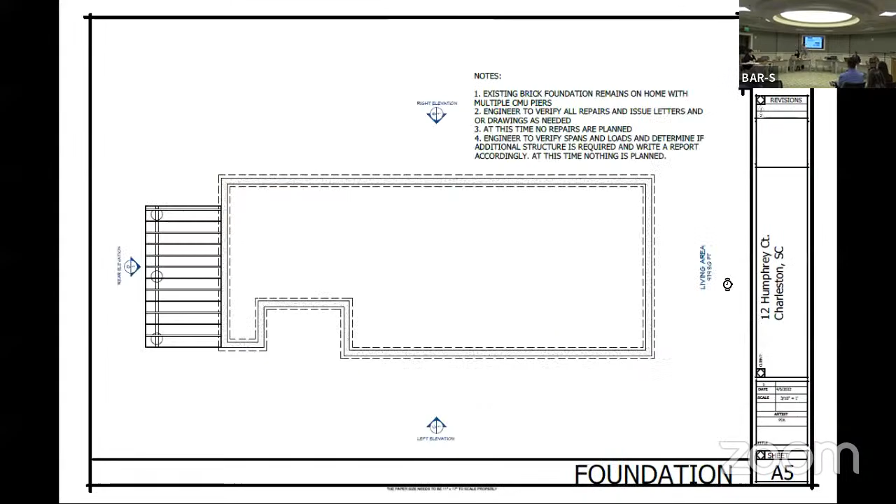I will apologize to our audience. We have an issue of reaching a quorum on this item, as one of our board members will have to leave after this first item, and I need him to participate in this particular review. So after this, we will jump back to our first agenda item.

37 New Street is requesting after-the-fact approval for removal of historic fabric from the front facade and reconstruction with CMU. A sample panel was reviewed on site this morning. It is a category 2 structure in Charleston, circa 1865, in the old and historic districts.

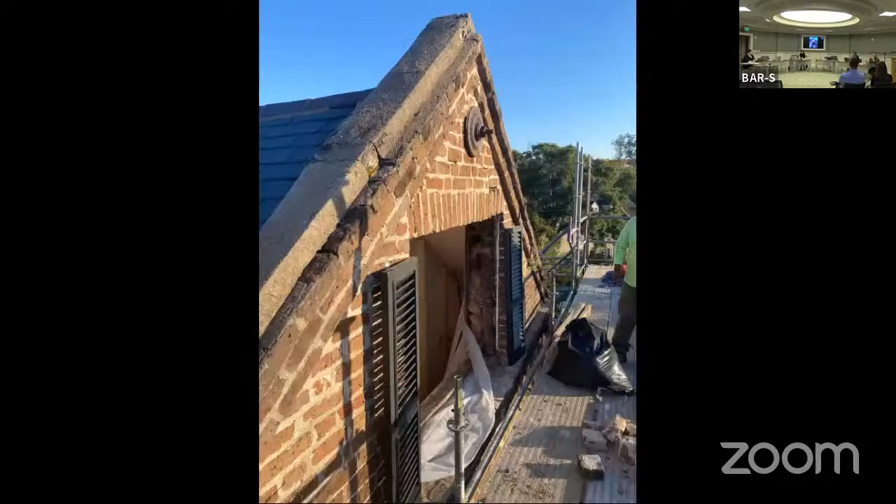I believe this is the beginning of what you guys provided for this week. I'm Julie O'Connor, and I'm here with Buzz Morris, the contractor on the project, Mrs. Ann Thomas, the owner of the property, her daughter Lisa, and Russell Rosen, the engineer on the project.

I'm just going to do a little introduction and then turn it over to them for the other details. For those board members who weren't here last time, Mr. Morris was hired to repoint and repair the front facade of the house. When he began, he realized there was a dangerous bow on the front, and he consulted with Mr...

Rosen was also very concerned that the brick was going to start falling off of the house, so they took the brick wall down. They saved about 95% of the bricks, and they are on site. Then they began the process of rebuilding the wall with CMU per Mr. Rosen's structural detail.

And then reinstalling the brick. The brick was installed fine, but the mortar was pretty sloppy and messy, as was noted in the last meeting. While we were on site last time, April Wood from Charleston Foundation recommended reaching out to Mr. Morris. He contacted them immediately, and they are the ones who have done this new sample.

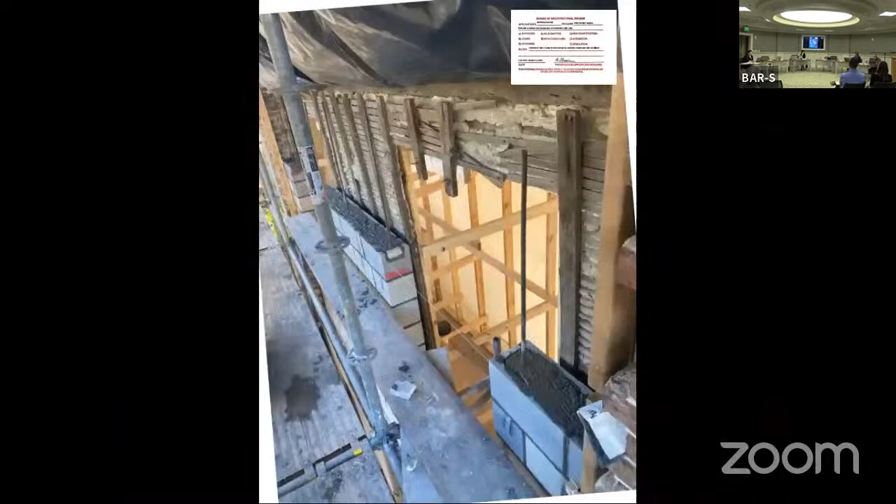Frankie, could you put up that picture from today? We were asked to supply a mortar sample to staff for them to approve, which we did, and brought the mortar sample just for the board members.

We were asked to submit a structural report, which Mr. Rosen did, and he is also here to talk and answer any questions. We were asked to do the mortar sample, which we did, and a mortar analysis, which Metters performed, and that's in your information. And then also the new test panel, which is a huge improvement.

I have a question I wanted to ask during the presentation, but that's out of order. I'll wait till you're done. It's okay, you can ask. Well, I'm sorry, I didn't know about the meeting this morning.

Can you just point out which is the latest sample? I'm a little confused about what is the latest sample. The latest sample is here at the top. And it's going into the old right here. This is the good one, the one we do want, not the one we took down.

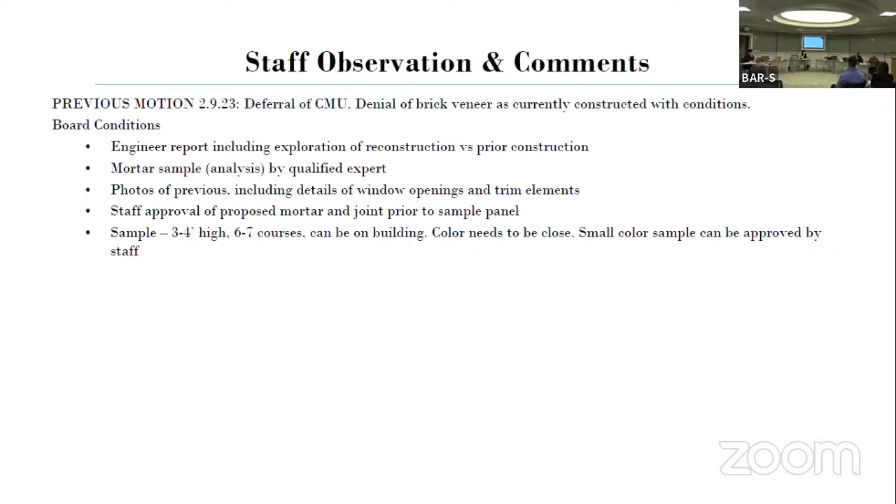So, want to let the board know that we have received the mortar sample of the joint, which we've now provided to you guys. As for comments, the engineer report does not include exploration of reconstruction versus prior construction, or detail how the new CMU wall ties into the historic brick wall. I believe those were both things that were included in the previous motion. Staff has concerns about how the brick veneer is tied into the CMU wall and the sustainability of those ties. The existing brick veneer should be removed and redone with clean mortar joints. Old mortar should be cleaned off bricks before use in the new veneer. So staff recommendation is approval of the sample and denial of the current installation, for it to be redone correctly.

Thank you. Does the applicant have a response to any of that? Morris Construction. I feel like you're talking about the report that Russell created for us to explore rebuilding it like it was originally built, and that kind of thing doesn't get thought about with modern construction. It's just not useful.

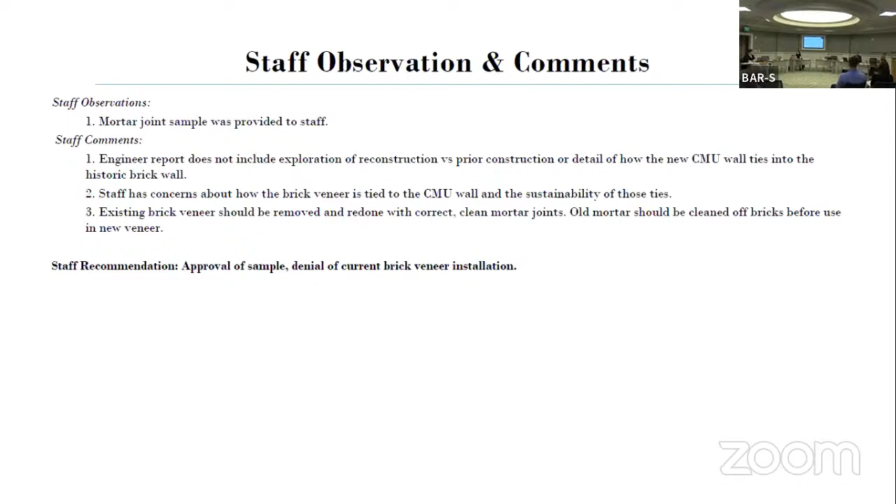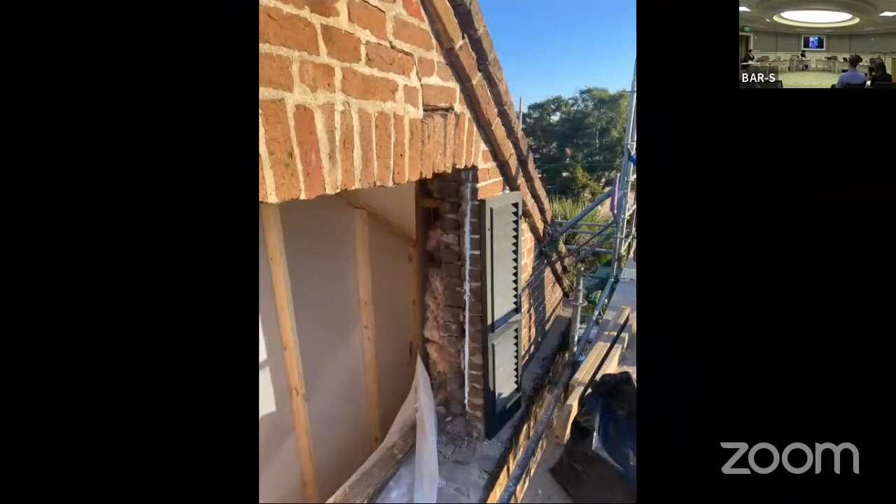I have one more comment, because I respectfully take issue with what Preservation Society said, because I think it's inaccurate. We are charged as professionals with making the building safe and stand up. You can't always build something the way it was built, as Russell just said, because if you did, it'd fall right down again—not only literally, but physically with the codes we have to meet. So I do think that's inaccurate. And that's not to say that what happened here was wrong.

It was approved for just repointing, should have been repointed. The error is that this whole thing came down, and granted, if it was a safety issue, that's fair and I acknowledge it. But there should have been a call to staff—wait a minute, we've got an issue, could you come do it? You'd probably hear Mr. Rosen's explanation of all of this and say, okay, unfortunate, but let's do it. And that's what we have to do.

So I think it was incorrectly stated prior with the comment on the Preservation Society. The error is in fact with the process and how this was handled for getting it here, but it's where we are. So it feels like it's more addressing the physical appearance of it presently.

Do we have a motion to consider?

And that's after you suggesting that the brick veneer gets removed—yes, what they had installed before. That was the previous board motion, denial of the brick veneer as currently constructed, and then there were conditions that more information was to be provided. So we were just reiterating that previous motion, that we were recommending approval of the sample, but that the current installation be denied and the brick itself be redone, per the previous motion.

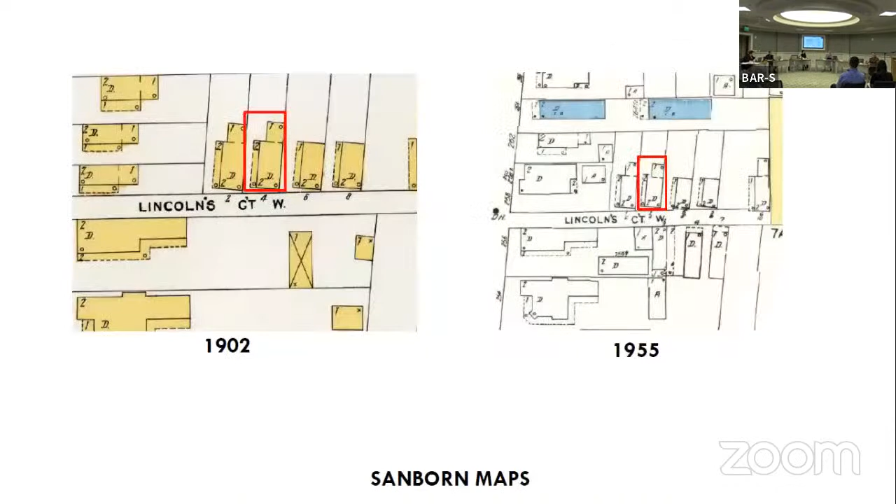So my name is Jason Myers. I'm with MFI Properties. We own 12 Humphrey Court.

We got a little bit in front of ourselves. You go back to what it looked like.

So this is what it looked like when we purchased it. And this was all kind of aluminum siding. And when we got under this, the previous owners had already replaced the majority of this just with plywood. They had actually replaced this window, and these two windows look like they had been replaced, but they were maybe 40 or 50 years old. So this was all something that they did.

So when we got a hold of the property, we in turn got in there and started to investigate what we had to work with. Replaced most of the rotten wood, which was under the initial permit that we pulled. I came back and got a stop work order in summer, maybe August, that we'd gone a little bit in front of the permitted work. And then if you go to the white, okay, we had put up a Hardie plank and we had just enclosed that.

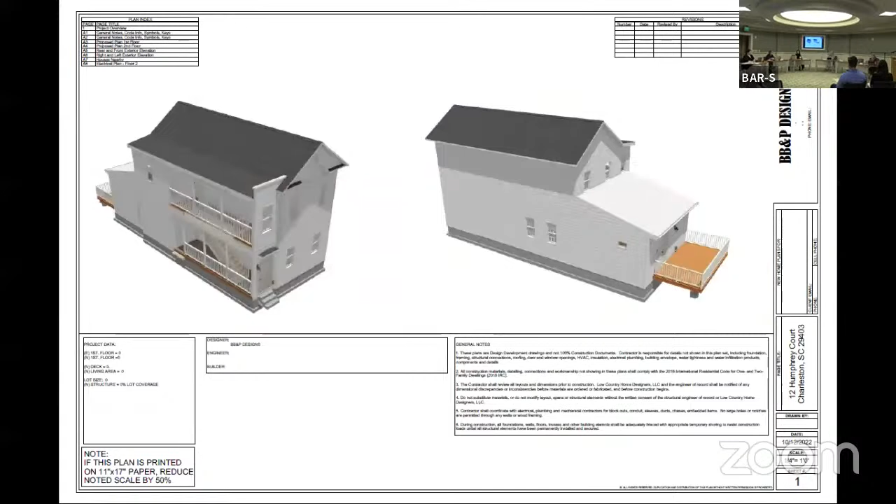So going back right here.

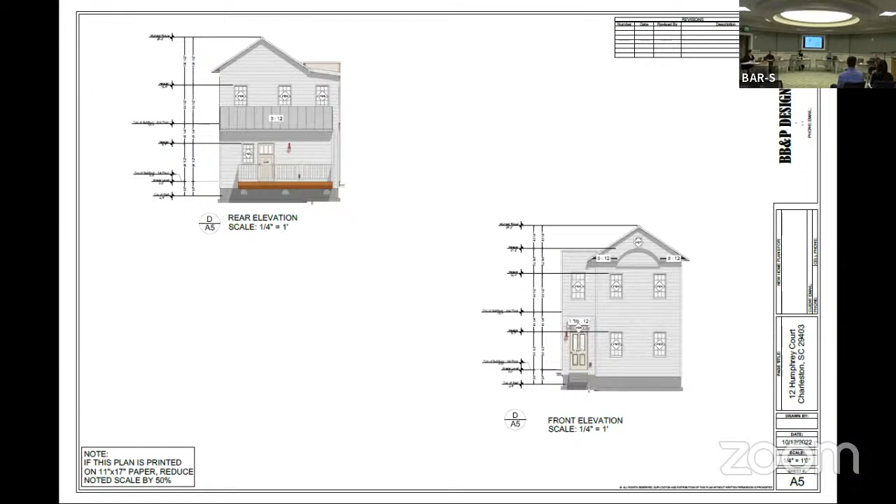I want to know the materials called out in the notes on the drawings, like the type of windows and the type of material you're talking about using. It was my understanding we need to go back with single pane windows that we could manufacture ourselves. Right, but what I'm asking is, if we're looking at a drawing, does it say that on the drawing, that's what you're doing? I'm not sure what all you guys have. I'd be surprised if it's not in there. I don't think there's four pages. Right, I'm just trying to see where that says that.

No reason to go. Yeah, that's something I know we have, so.

Other question? Public comment, or no public comment?

April Woods for Historic Charleston Foundation. HCF has reviewed the application for after-the-fact alterations to the piazza, siding and windows at 12 Humphrey Court. We're concerned about the extent of the removal of historic fabric and loss of historic character. If the applicant had worked more closely with the city in obtaining appropriate permits, this situation would not have occurred. We respectfully recommend denial of this application and recommend that the applicant work with city staff.

Preservation Society of Charleston. The Preservation Society is concerned with this after-the-fact request for what appear to be alterations to character-defining features. The submittal was difficult to understand as it did not provide information on the previously existing or current condition of the property. Clear information regarding what has already occurred without approval and what is now being proposed is needed before this application proceeds. However, based on our staff's observation, inappropriate unapproved changes appear to include completely enclosing the piazza, alterations to the piazza door and transom, as well as replacement of historic 6/6 windows, siding, trim, and other elements with modern materials. We ask this applicant to return with a complete submittal that clearly outlines the nature of this after-the-fact request, and in terms of new design, draws on neighborhood precedent to inform a sensitive proposal utilizing historically authentic materials. Thank you.

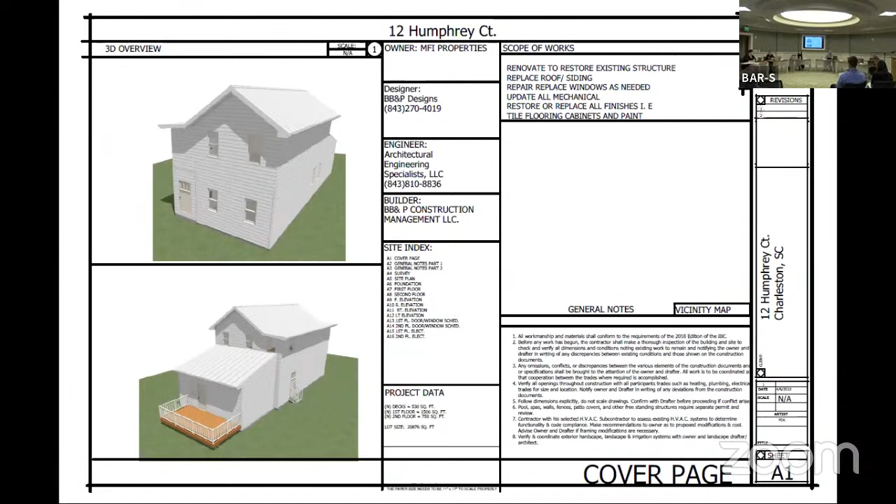I had a bit of a timeline which the applicant has already gone through, so I won't repeat that. We had a list of the work that had been done: removal and replacement of wood windows with vinyl windows, removal of wood siding which could be seen in some of the images under the aluminum siding, removal of the wooden front door, historic transom, the hood over the front door, and enclosure of the piazza. The applicant should submit revised elevations to match the previous structure, and floor plans to reflect the exterior of the previous structure. Windows should be replaced to match previous in size and materials, which would be wood windows, true divided light. Wood siding should be replaced to match in dimension and profile of the previous structure. The transom over the front door should be replaced to match, the front entry restored, and the piazza reopened to match previous, including the parapet and roof slope.

Our policy severely restricts enclosure of piazzas as they are character-defining features. So the staff recommendation is denial of the after-the-fact request, with reconstruction to match per staff comment. And typically when we go after the fact, there's a time limit on resubmitting to the board.

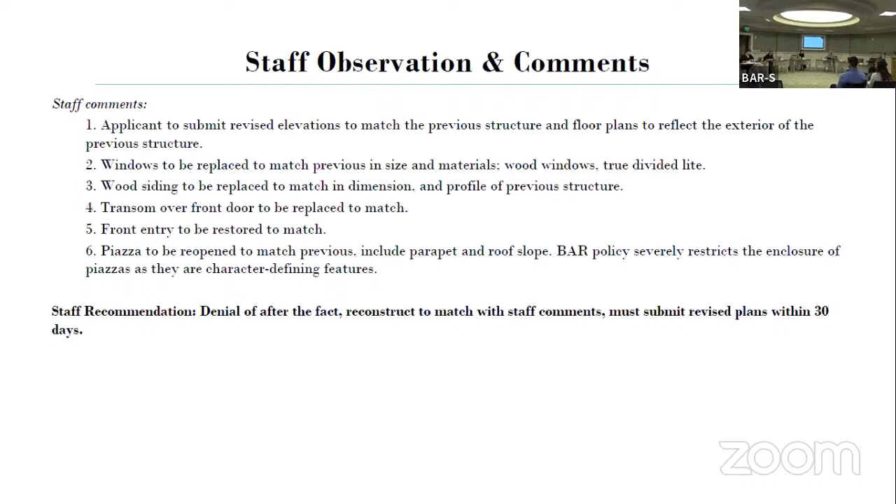Next item on the agenda is 167 Grove Street.

167 Grove Street is requesting a partial demolition of a historic structure, including the roof. It is category 4 in Wagener Terrace, with circa dates of 1935 and 1945, so I'll reference both. It is in the historic materials demolition purview. This property is located on Grove Street.

Existing site photos, some context of Grove, an architectural inventory photo from 2004, and a Sanborn map showing the history of the structure.

We'll turn it over to the applicants.

Members of the board, thank you. My name is Ben, and today I'm here with my wife Lauren. We've lived at 167 Grove Street for about 4 years, and previously in the Wagener Terrace neighborhood for more than 10 years. We love where we live and want to stay. We're recently married and looking forward to raising children in this unique and diverse neighborhood we've both called home for more than a decade.

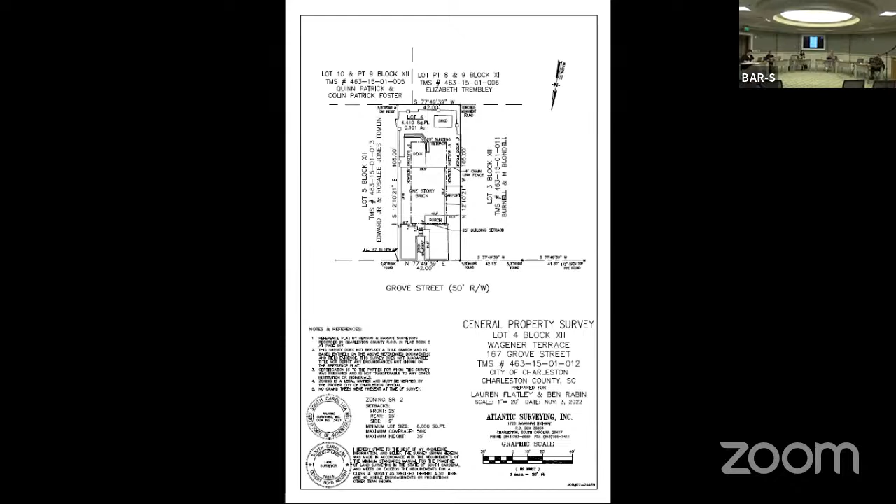The existing roof has an offset cross gable design, which makes it unreasonably difficult to utilize our attic space. We believe this roof does not carry historical significance or contribute considerably to the character of the home or streetscape in either its design or material construction.

Ultimately, we imagine a simpler roof form built from the existing bearing points, maintaining the eave profile with a moderately higher ridge, allowing for sensible use of the attic space as a livable half story. This change would be minimally visible from the public right-of-way.

The manner in which our home sits in relationship to the adjacent structures obstructs view of the roofline from street level. We explored layout options to add a staircase into the existing space, and the complex roof structure with its multiple valleys and supports doesn't allow for this design in a sensible manner.

At 167 Grove, we have a smaller lot size, and it makes more sense for us to build up rather than out the back. We understand that the board may recommend the addition of another structure with a zoning variance to the setbacks, but it is our desire to preserve our backyard space, which we greatly enjoy and consider an invaluable feature for our dog and our future family.

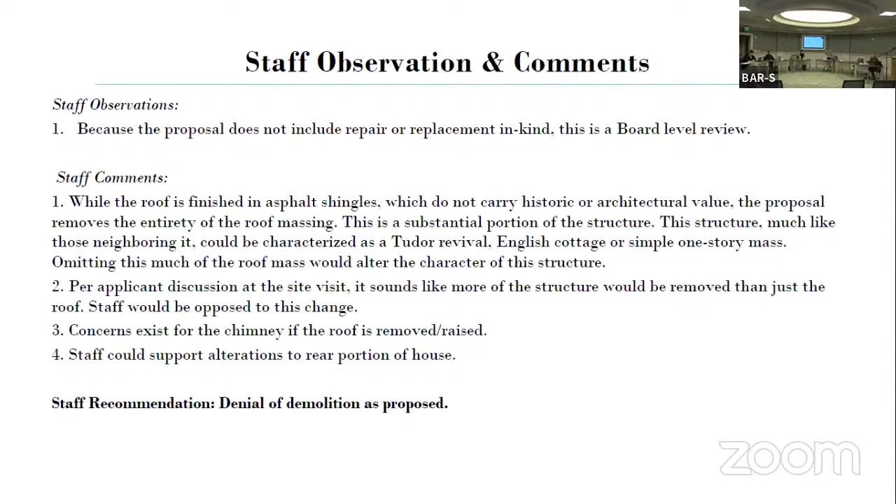Go to a couple of the photos. Sure.

I had one question about the one where you're in the attic - where is that at? Because it almost looks like there's a hip at the back side of the roof. I have my back to Grove Street in this photo, and where I'm standing, my head is probably at the main east-to-west ridge. I'm standing with my back to the street. Oh, I'm right up there.

Okay, so this is filled in from behind, inside of the attic. No, it's all open. Actually, I'm standing not here but here, so that gable is off to the side. It's all open, and as you can see with all the stickering and whatnot to support the roof, there's just not a lot of space.

Sorry in advance, because y'all got a very nice, polite, information-filled presentation. But I agree with my peers, because the very premise of trying not to change the architectural character, although that sounds minimal, it is - because as Julia pointed out, you see your gables and the brick. If you're changing your roof pitch, all of those change, so you're having to either fill in brick or do something. So the demolition is not insignificant.

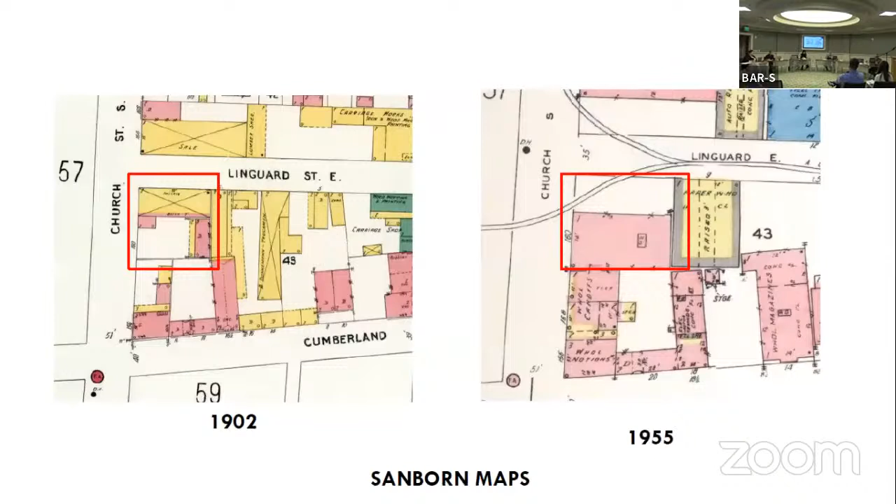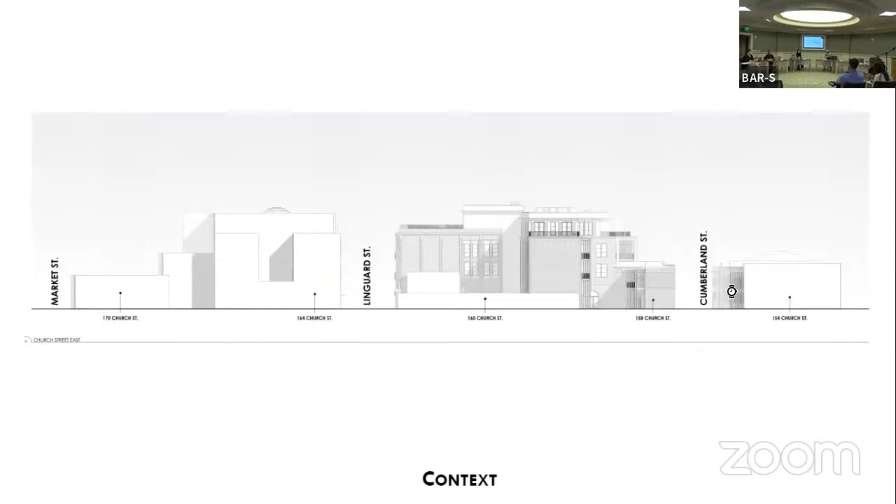Context: a Sanborn map showing the history of the property. This morning the board visited the site and had some questions about a project that has gone through BAR at large, been approved behind it, and wanted that for additional context as it's going up. So this is a slide from that presentation. This shows this structure in the center, just sort of blocked out there, and it's seen a little bit better here on Linguard Street, right there, just to provide some additional context.

And I'll turn it over to the applicant. Hi, thanks, I'm James Seabrook. So we were doing some work on one of the pictures that showed a bit on the front—I guess you'd call it just an open air little wood structure and stucco facade. This is all open; this is the entrance coming in from Linguard Street.

We had a permit to do some basic carpentry, replacing some rot. When we got into it, we started noticing there was some structural rot and studs coming down from these—these are basically columns here. After a while, we decided it might be a better working solution, because it's not very pretty now, to just demo it, pull it down, and put up a green awning. Currently people sit under there and eat.

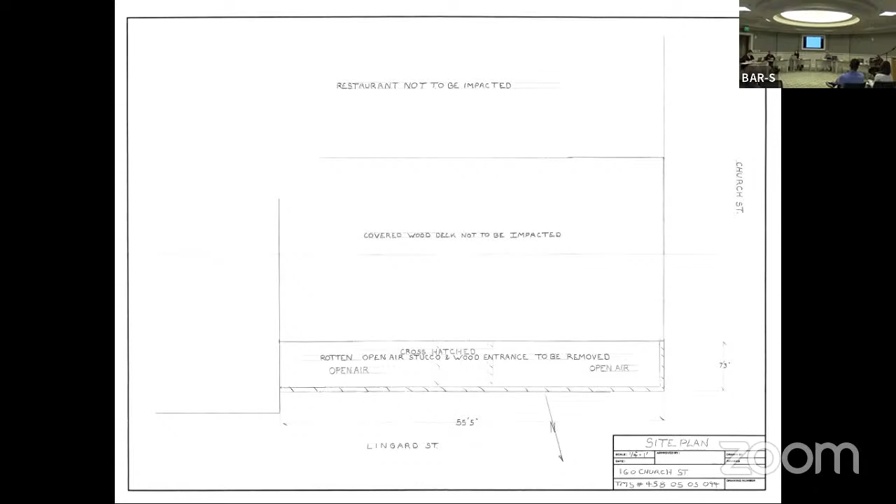And that's basically it. Do you have any thoughts about how you could potentially screen those rooftop mechanical units? This structure does sort of help screen that—there's a lot of stuff up there. Any thoughts on that? I mean, we could certainly come up with a small wooden structure. I know what you're saying—when you stand back on Church, at the corner, you can see some of the AC stuff. So sure, there's definitely something we could put up there.

I don't know exactly, there we go. Right, like right here, you could certainly put something up. What exactly, right now, I don't know, but it would be pretty simple. I envision probably some sort of small wooden structure that would anchor in somehow, but that's the first I've thought about that. I think that's a lot prettier than what's there now.

So, presentation is closed. Public comment? Any public comment? I don't believe we have it.

Staff recommendation? Staff just had observation that the corner element was constructed approximately 1990 from the drawings we found in the files. Staff comments: proposals should include some sort of a corner element, not just an awning, in order to anchor the building and respond to the street edge as it does now. In doing so, the project could be reviewed as an alteration instead of a demolition. And the other comment was to provide screening for the roof mechanical as the current configuration does. Staff recommendation is deferral for additional information.

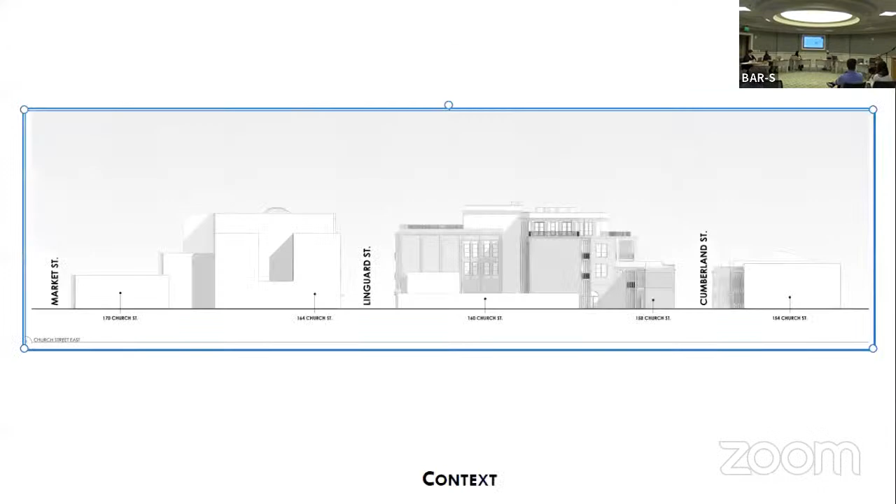Currently, it appears—it's hard to tell from the drawings—but it appears that you are proposing to kind of recreate that column at the corner of the porch. You're in the Photoshop. Here. Mm-hmm, so this column's not there now. This is a column. Can you go back to the current view? Sign reference, thank you, sorry. It's okay, I should have put them side by side. Right, well, that's the closest angle I've got. If you can kind of see right here, this is that column that you're seeing in that other picture, right here, and that of course stays.

And there's a little set—this is a dark section right here. This is what we would have been if we took this away. This little section here, which is a few feet long, would have come down. But we could certainly leave this, leave that, tie in going up Church, and just take off from that section back, and that would keep what you're talking about. Yes.

Fair enough. Is the intent then that entry element as well, that's a new piece? Yeah, where you see that green awning. Yeah, like you build something new in the proposed. No, if you went—so this would be removed. Yeah, and then just behind it, it's kind of hard to see, there's almost another little piece that's like this already back behind there. It, that would stay.

You want me to go to your Photoshop? Yeah, so I think that, so this piece is behind that entrance, this would stay. And then, of course, all that—it does translate to sidewalk basically without something there. But in the Photoshop, it sort of looks like they're adding a column right there. Any questions?

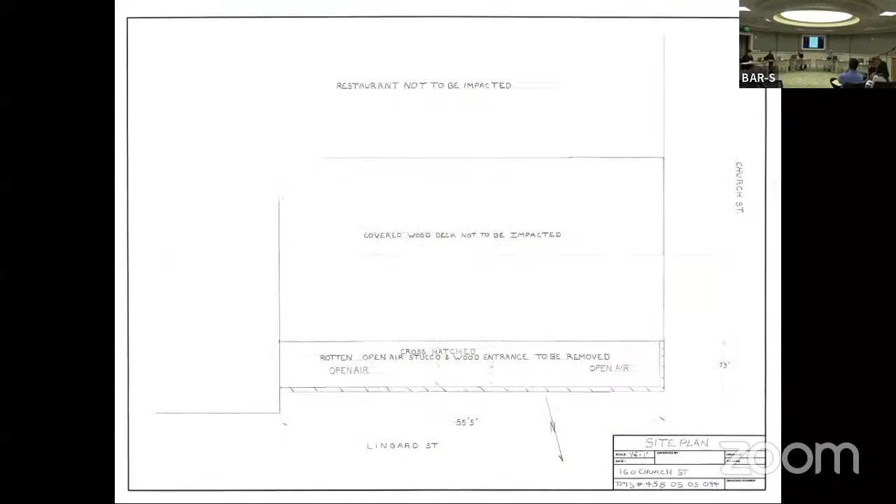I would hope that, because this zone in the Photoshop, right where that lady's standing - Frankie, can you jump back to the Photoshop with the awnings? This zone right here, I mean this is your property right here, right? Correct. See, it just looks like you're giving it up, man. Right, it's valuable real estate right there.

So that's what I was thinking. And I get what you're saying, and we can do that - if I drew something other than that column, whatever, and we would approve that. And would it help to have tables and things set out here in a picture, just showing kind of how it's used instead of just blank concrete?

This could just simply come back, not as a demolition, but as an alteration, with appropriate drawings to show what the alteration is and what you plan to do. And it could come back that way, it wouldn't have to.

You could sort of skip this step. Right.

I didn't envision you were just wanting to create a sidewalk and stick tables on it. I thought you were going to have an expression that, hey, our place ends out here, not back there. Is that not? Yeah, I guess I was thinking that the awning established that, and maybe I could have added some tables, like this is ours. The awning establishes that that's our restaurant. I just didn't think of putting some tables here to show that that's how it's used. But certainly with the awning that would go back, there would be no question - oh, that's the restaurant, we sit out here and we eat.

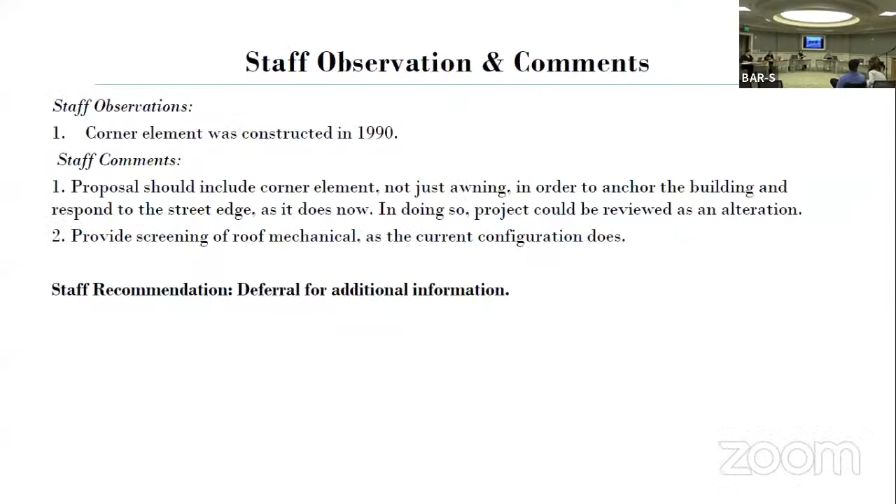The next item on the agenda is 905 Ashley Avenue. 905 Ashley is requesting partial demolition of historic structure, including a portion of the roof. It is a category 4 in Wagener Terrace, circa 1940, requiring a historic materials demolition permit.

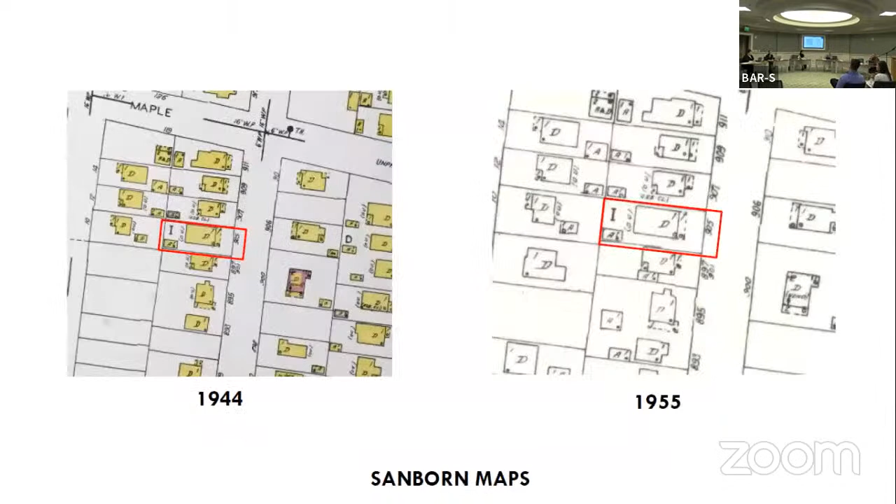Location on Ashley Avenue, existing site photos, some context of Ashley, showing the history of the structure, and then we have the architectural inventory from 2004.

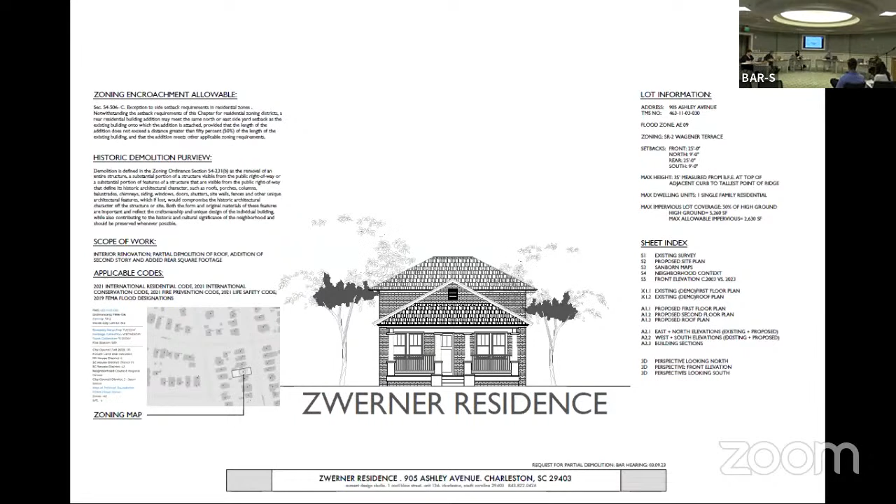Request for a partial demolition of the roof at 905 Ashley Avenue. This is gonna feel like Groundhog Day for two of you, but we wanted to resubmit this presentation quickly while it was still fresh in memory. I want to thank city staff and the board for comments and clear direction at the last hearing regarding how to modify this request for partial demolition. Thank you. So take us to sheet S5.

So bring the board members that weren't here last time up to speed. I'll quickly summarize with this side-by-side imagery. We can see the architectural elements original to the house have already been pretty stripped. Comparing, the columns are now not original, the railing is now not original, the roof shingles are obviously not original. The brick siding on the house, we looked at on site at the last site visit — they're different in appearance to the foundation brick, and they're also wire cut.

That, coupled with the Sanborn maps showing it originally was not brick clad, indicates that the brick siding isn't original to the house. I bring that up to illustrate that in the elevations, as we're asking to remove that brick, it isn't in fact original to the house.

If we can go to the page just before this, in S4 — brought up this top row of imagery on Darlington Avenue, just one street east of the house we're discussing. These are case studies in which I felt there were successful alterations made to original single-story structures, where the original massing was still very clear and distinct, and modified for growing families. So that is the intention here.

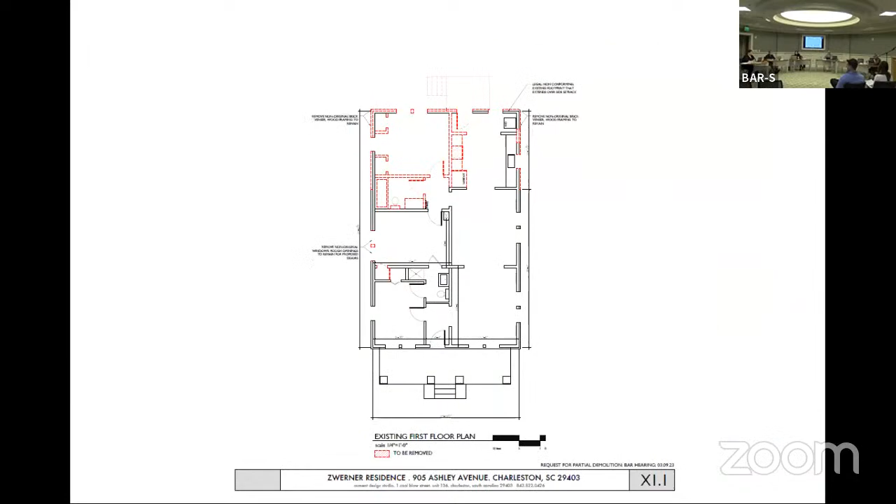So, nope, you're in the right spot. Perfect, thank you. So we've reduced the request for demolition pretty significantly. Previously, we were asking to remove the roof from this point back. Now we're just selectively asking to remove portions of that front massing.

Again, I'm trying to make this clear graphically. This brick veneer is not original to the house, the window is not original, so this would go. But then this ridge, the rafters and the eave in the back portion of the house, that is original. That's what we're asking to do.

If we can jump to the 3D perspective, just because I think CAD is always a little more dramatic than what would be perceived in the public right of way. Here we can compare — as you're traveling north along Ashley, you can see the original massing much more clearly. That ridge beam stays intact, those eaves stay intact.

The dormers are a more subtle addition to allow us to take that attic space and make it habitable. Also, regarding staff's comments in the previous submittal, these doors are to replace a pair of windows. So those rough openings — the intent is we're taking a pair of windows and filling that with these new doors. I wanted to make that clear as well.

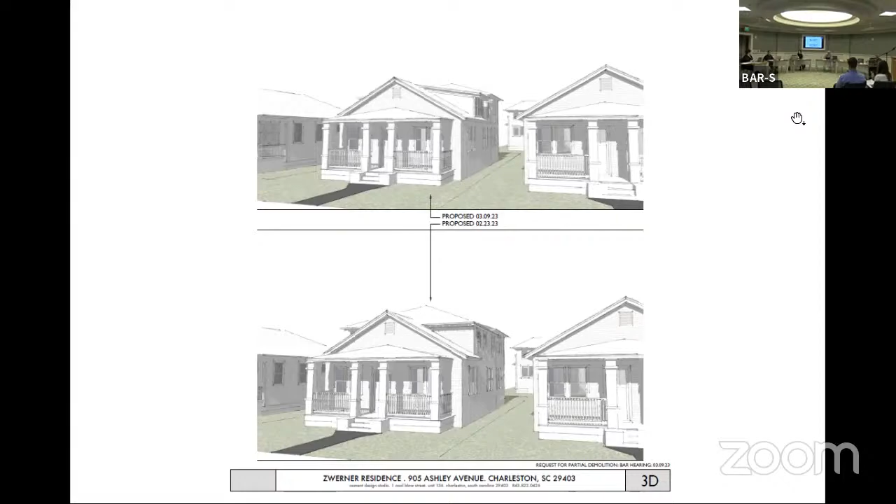Questions? Just a quick graphic question. Looking at the proposed roof plan on A1.3, it's like you're now proposing a double bay shed dormer, two windows wide, to the front, and then there's a single, and then there's this addition. On the roof plan here, well, looking at the elevation, I'll jump over that real quick. It looks like there's a conflict of these roof lines against that shed dormer, but it doesn't show that on the roof plan proper. Is there something?

Yeah, makes sense. I guess it's just this new roof line going back and impacting this guy, into that dormer. Yeah, so I think what you're saying is I need to make these rafters higher. Well, or move that dormer forward or something. So, yeah, this is on the opposite elevation, and that's where my stairs are, so I need the headroom. We're fighting for space here. Okay, there wasn't a conflict on the roof plan.

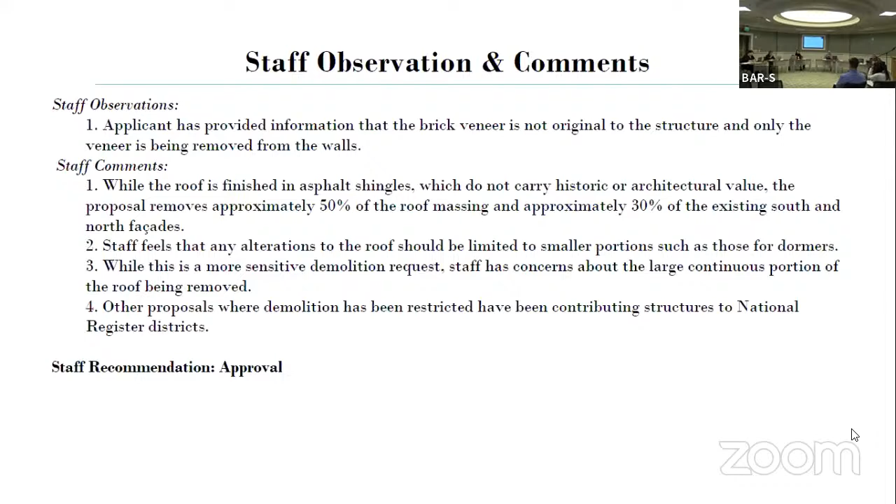If everyone wants maybe two more questions, can you pull up A2.1, Vicky? So this is today, right? That's today. I'm just curious, what is this white line that wasn't there before? I think that's probably just a hatch that didn't get applied—it's not a suggestion of a corner board.

This proposed section, it doesn't come out proud of the brick—it does not match the masonry walls. It's working with the existing framing that is beneath the brick veneer. And you are proposing a one-story addition, correct? Correct, a one-story addition, which is completely independent of the existing roof line. That's right.

Did you consider making that a two-story? Did you consider just having another big dormer here?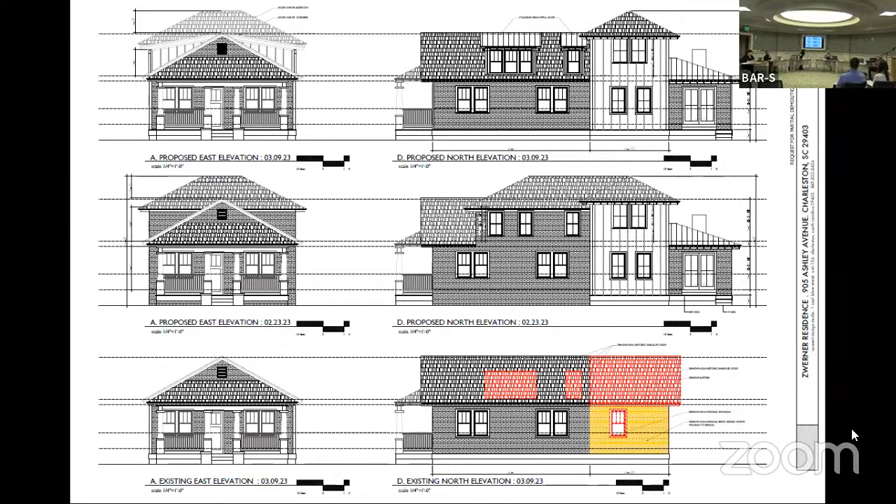So if you look at the section—which is probably A2.3 maybe—this dotted line represents the original roof rafters. So when I'm under here, I'm at kind of the minimum of my space that meets both egress and height limitations. So it works okay for children's bedrooms, but not necessarily for people who are 6'4". Thank you.

Oh yeah, we're still—very important discussion. Okay, well, I mean, I think it's better. I mean, it's definitely better.

I've been wrestling with this, because I know a similar roof line down on Haygood Street was denied for infringing 8 feet into the existing roof from the rear. That had to do with one of our comments—that property was in a National Register district and had an existing metal roof. Between Hunter Park Terrace and Wagener Terrace? Our purview does not—just, one of them was in a National Register district and one was not, and that one was a contributing structure.

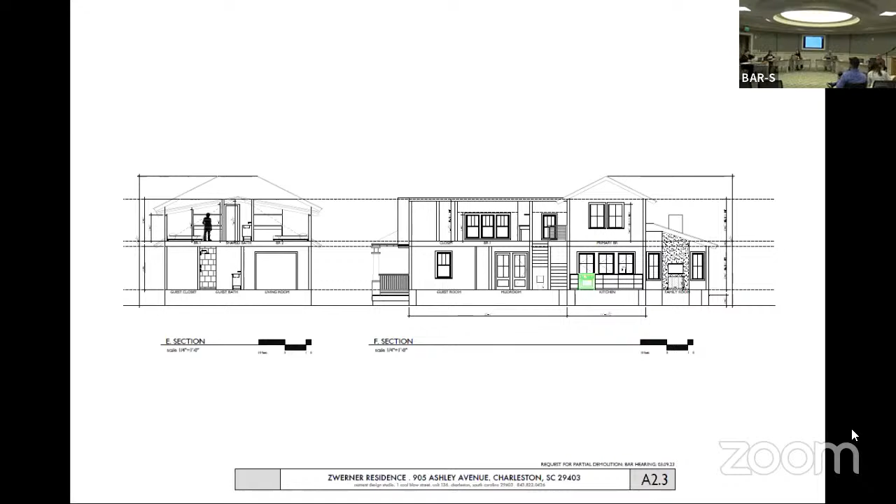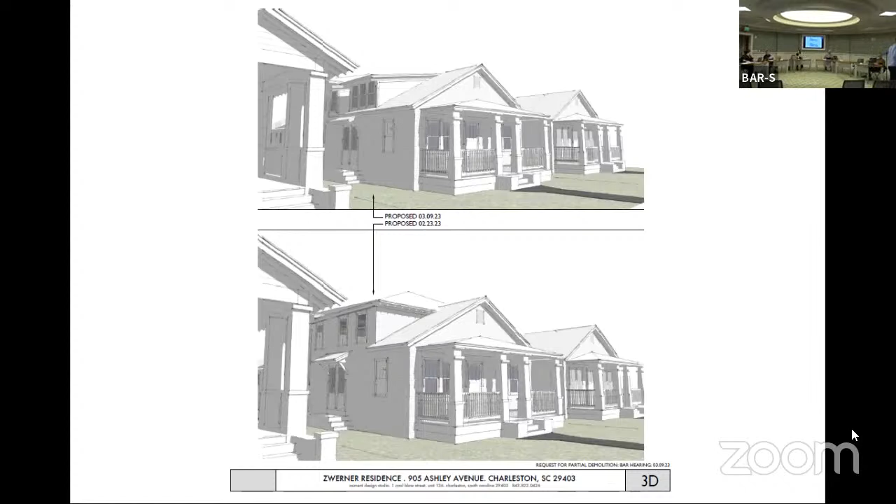Next item on the agenda is 22 Thomas. That's deferred.

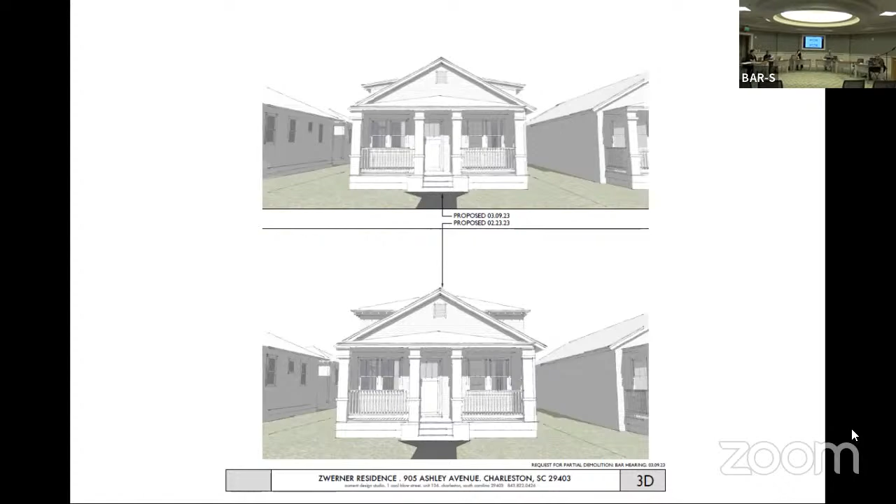So the next item on the agenda is 135 Meeting Street. Hardscaping.

One 35 Meeting Street, the Gibbes Museum, is requesting installation of an art sculpture at sidewalk level above. It is a Category 2, circa 1905 structure in the Old and Historic District.

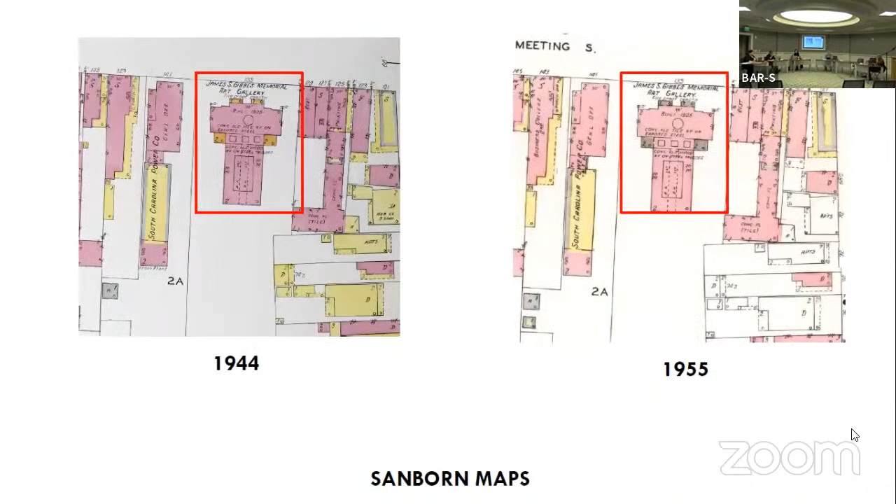This is the property's location on Meeting Street. Existing site photos. Context of Meeting Street. Sanborn map showing the history of the structure.

Turn over to applicants. I'm Joe Schmidt of Evans & Schmidt Architects, representing Gibbes, and Angela Mack is here with me, who can also speak to questions about the sculpture itself.

We were the architects for the renovation in 2015, and at the time there were plans to have some sculpture exhibited in front of the museum. It fell just short of funds, and we tabled it after that.

This opportunity has come up for this important piece of sculpture. Given the nature of this piece and how it's meant to be observed and experienced, it needs to be fully walked around and taken in, and that was easy enough until we added the layer of ADA.

As part of that whole process, we came to the realization that Gibbes is somewhat standoffish for something like this because it's on a raised platform. We want to draw this into the public realm, because that's the nature of this piece, and bring the sculpture down to the level of the sidewalk for the pedestrian experience.

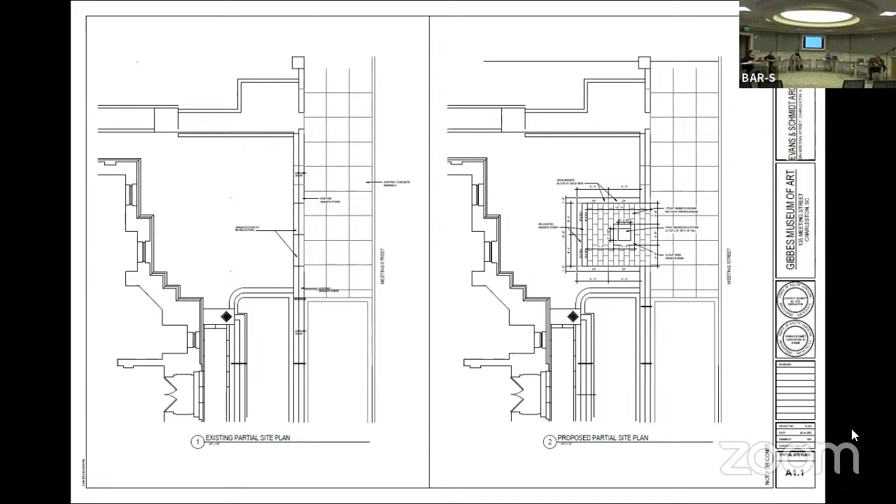The last decision was what the surfacing material would be. We had this installed in 2015 as the only public sidewalk that's not concrete, blue stone, or brick, and we did not want to bring that in. We didn't think that was appropriate.

However, this is a gray, light gray granite, and that's what we're proposing, but in a 12 by 24 pattern around the sculpture.

It even came up, even though this is only a 10 by 10 footprint, that this might be a stormwater issue, because we were removing the area where the jasmine was, which was supposed to be paved anyway. But at any rate, we will be setting these granite stones in the same way.

The sculpture already exists, as you can see. It was exhibited in the Rotunda. It was designed and commissioned to actually be placed out here ultimately, but it's after the fact, and I guess, like all the other applications tonight, we're after the fact now placing it where something's already been built.

Let's keep this going quickly, but take any questions. Any questions? I do have one. Is it going to be lit?

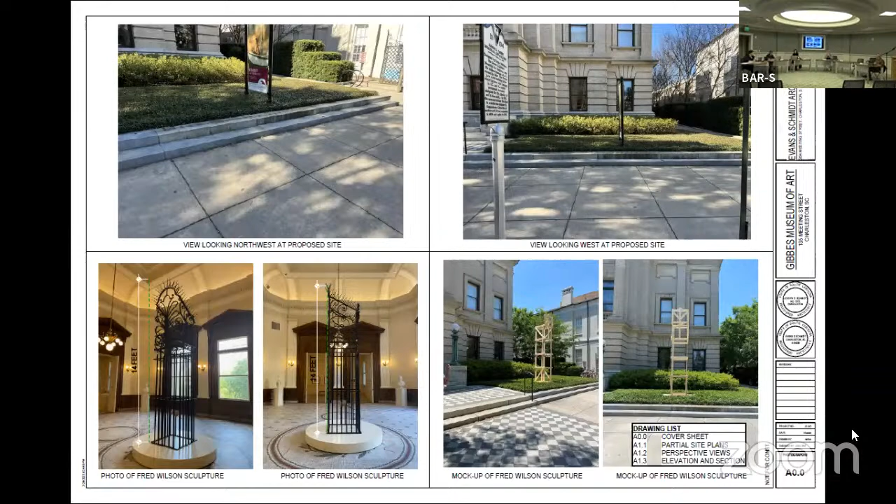We haven't gotten that far. Any more questions? Presentation is closed. Any written public comment? Nothing. No written public comment. Any public comment? No public comment. Okay, city staff.

That's some information for the board. This project, originally we had intended to review it at BAR Large, but for this meeting cycle, BAR Large met their cap, and their maximum is less than BAR Small. The ordinance does allow BAR Small the ability to review minor modifications for projects over 12,000 square feet. Staff's desire was to allow all submissions to be heard, and the ordinance grants a little flexibility, which is why this project was brought here.

While this project is for a landscape element, the property is rated a category 2 on the architecture survey, and policy requires that type of project be reviewed by the board. That said, staff's comment is that the sculpture's height is 14 feet, it has a minimal footprint, a transparent nature, and its position closer to the sidewalk than the building facade keeps it from dominating or detracting from the building. We are recommending final approval.

I'd like to respond to staff's recommendation - discussion and a vote. Regarding staff's comments, Joe, I appreciate the thought you put into moving the stuff. Thank you for putting a lot of thought into it. Is it easy to just recommend, make a motion? I'm for it.

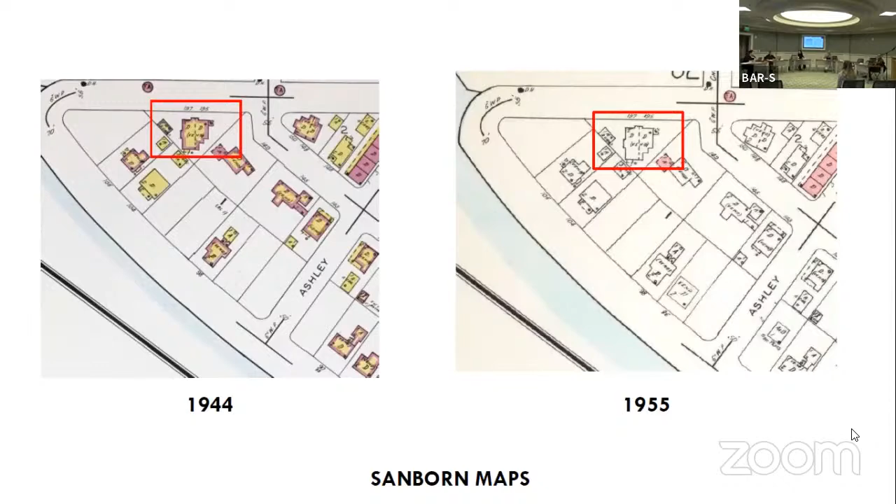Showing the history of the property. Right over to the applicant.

Good evening. We are back before you again, because of the deferral from a month ago. And we've changed our application.

We're proposing to go back with the original style windows with no divided lights. We did go back and further detail our plans and just add some of the actual brickwork that was already there. So the newest proposed plans do show all of the existing rowlocks and soldier courses and so on and so forth.

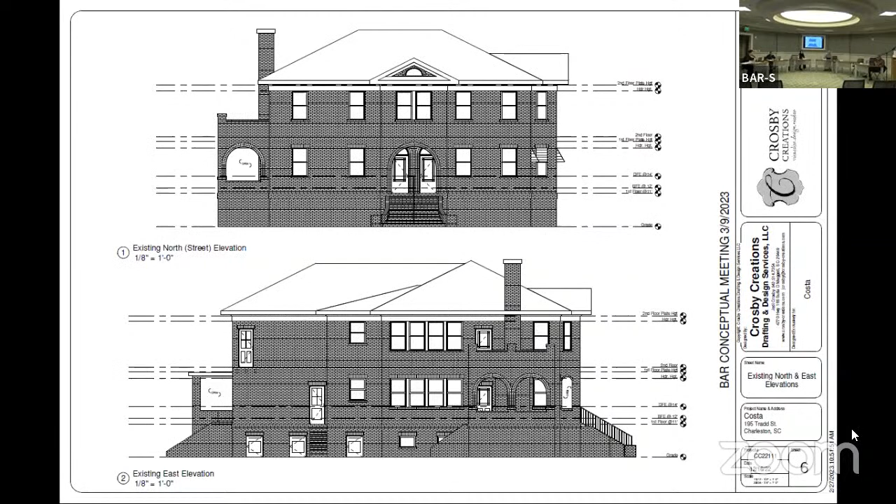Elevation, the only thing that is changing is going to be taking those awnings off that are visible from the road. On the east elevation, we're removing 2 doors. On that southeast side, removing brick steps that go up to one of those doors and adding a new arched window that's going to be located over the master tub.

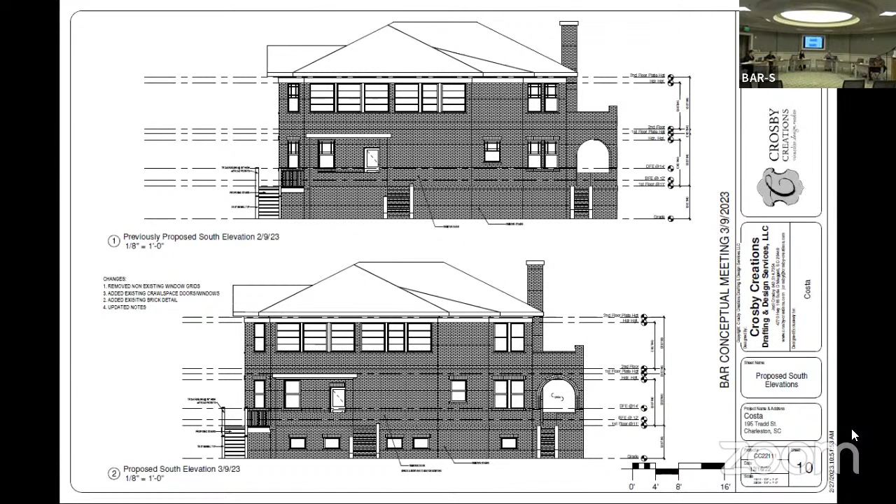On the south elevation, we're removing a sliding glass door and adding, we added some details to all of the sides. On the west elevation, which is the most altered, we are proposing to add 2 new windows, a new door, an 8x7 landing, his and her stairs that come down.

Everything is proposed to be painted in HC 190 black. And on this side, you can also see where the metal awnings were removed.

I know that it was brought up last time about the lack of research, and I went back and spoke with my staff, and the reason there was no research is because there's no research to be had, and I think that's why city staff couldn't find anything either. There's really just not much out there that we were able to put our hands on, except for to have the CSS David buried below it. That was pretty much the most significant thing that we could find.

So that is, I do have a detail of the window that they are proposing to install, which they're going to go and just duplicate what's already there. Questions?

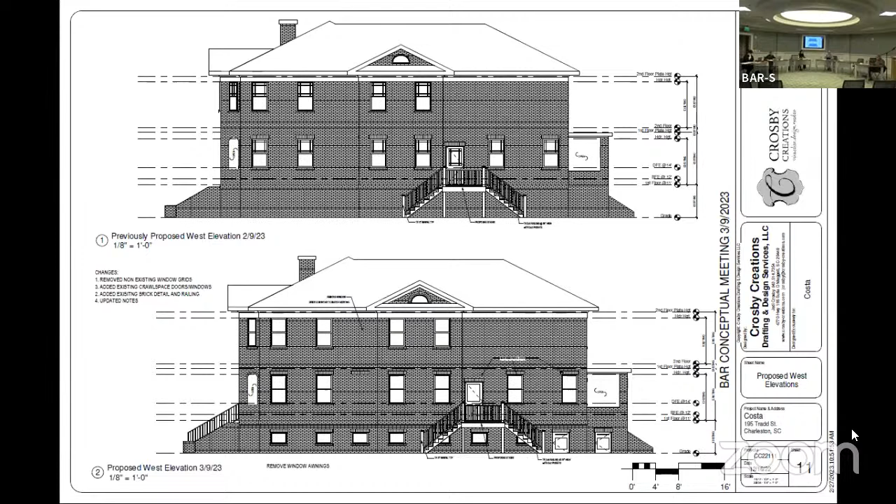Series of windows, I guess, right here above grade level. I'm looking at the west elevation right now. Is that, those are windows, correct? Is that right? Yeah, they go, well, they're actually hatches. They're hatch vents, aren't they? They're not actual windows down there. Can you go to the photos?

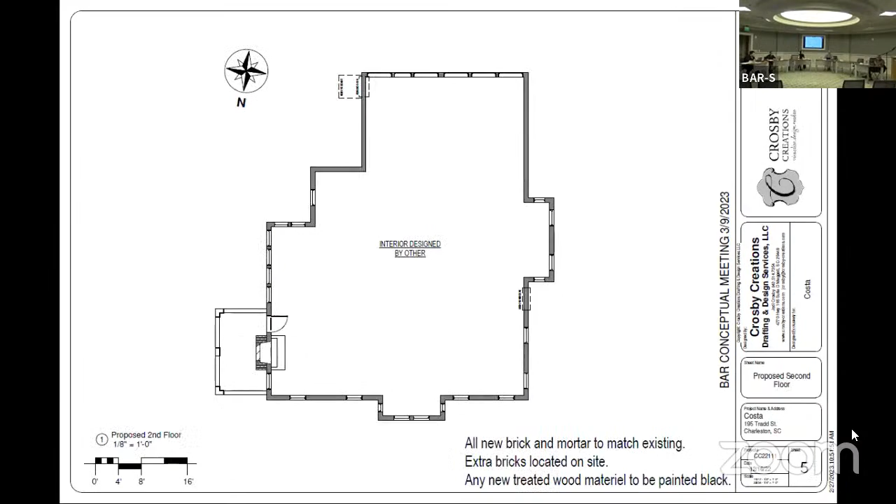Are they flood vents? They're like barred windows. Yeah. Oh, yeah. There is a pretty tall crawl space under the house. Okay. Okay. I was just, okay. Yeah, they're not proposed. Like I said, we just went and added existing details, so they're not changing. Okay. They're not changing. Okay.

Proposal is to replace all the windows. The proposal is to replace all of the windows with the same windows that are there, to add 2 windows, remove 3 doors, add another door, add a landing upstairs.

Any other questions? This presentation is closed. Any written public comment? Any public comment? Staff recommendations?

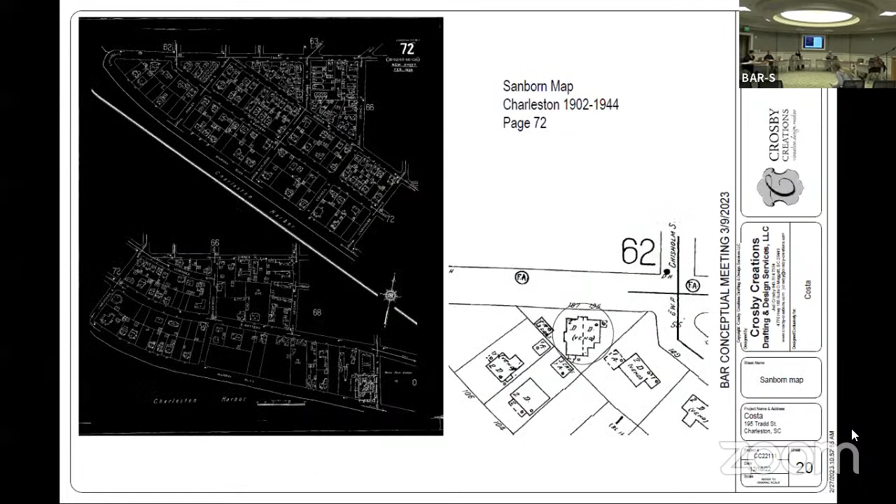I have just one concern, and that is the new porch on the west side, which is quite visible from the public right of way. And as detailed, it's just kind of like a suburban deck, and I don't think it's gonna age well. I don't think it's good enough for this property. I think it should be a lot more substantial, ideally masonry or just something that is more in keeping with the quality of the building. Otherwise, I like it.

Same thing caught my eye. It's sort of called out kind of deckish, and I was first thinking maybe at least some sort of skirting below it, but then making sure that all the parts and pieces are - if it's just treated 2x2s, that is definitely going to indicate deckish.

Railing profiles and all that. So there's a degree of refinement I think that stair and deck system, porch system should have. Even maybe some form of a skirting at the base. That would be the main point. So we zoned in on the same detail.

Same thing caught my eye. I think that the stair at the back, that elevation, west elevation - the stair on the west elevation - I think that the material should be upgraded to better equate to the house. Seeing those newels right on the ground just makes me nervous, even in 2 dimensions.

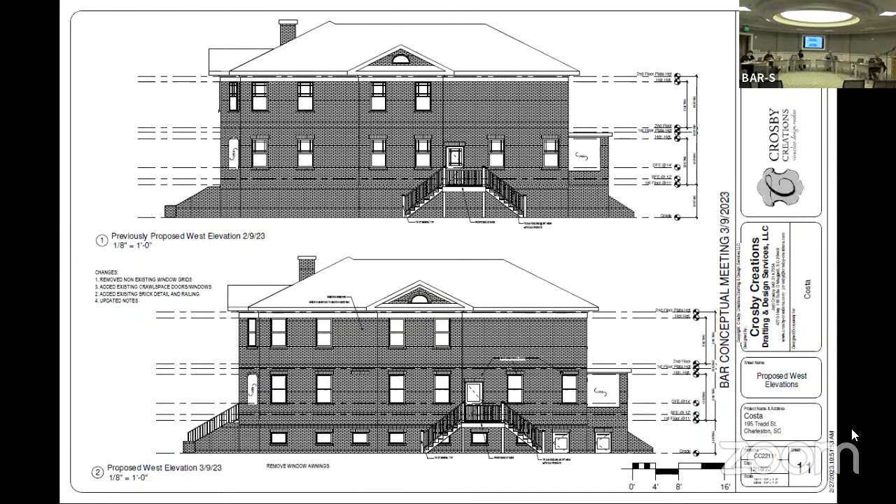And over to the applicant. Good evening, I'm Michael Brewer. Just a little bit of background - we purchased this property and it's zoned for 3 homes. We decided our main thing in developing this property was to maintain as much green space for both structures while having the least amount of footprint, so we have no zoning setback issues or anything of that nature on lot occupancy, but last meeting we were deferred.

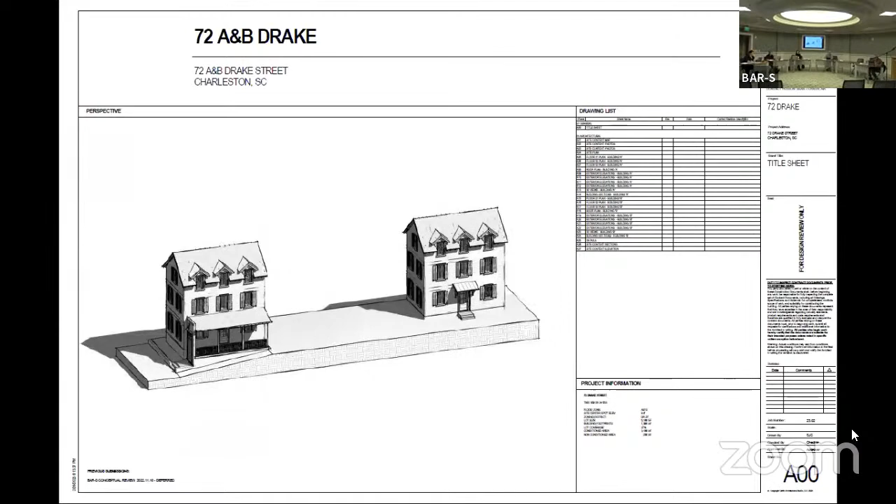We focused on the proportions of the windows, the scaling of the screen - the piazza screen of the front. A house - the B house, we added an element over the door. For Ms. Martin, we provided steps to get up to the A house because we didn't have the door, and now we get a proper entrance into the home. Then preparing for final, just kind of working towards final, we went through and were very thorough about all the materials, all the stock numbers of Southern lumber for trim. We have the windows provided, we have sections now, the piazza, in the rear portion of the house. I think you'll find it's a drastic departure from our first iteration.

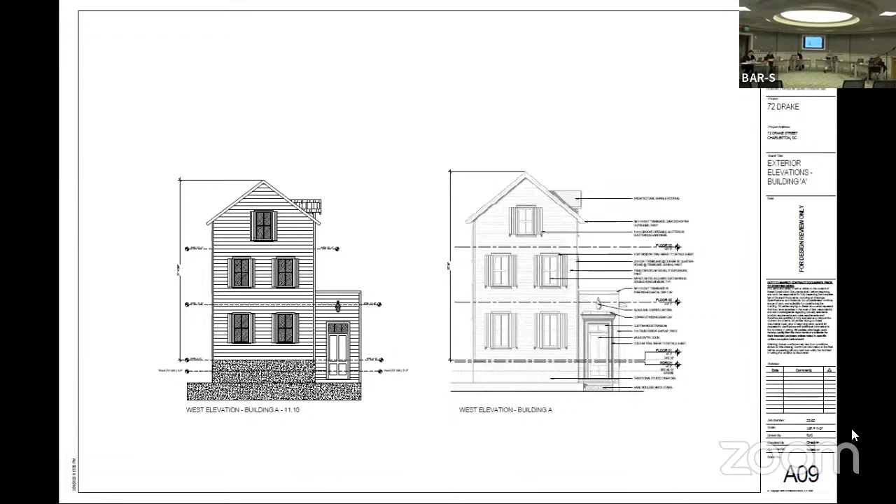Our staff just had an observation that all of our previous comments had been addressed, and we were recommending preliminary approval with a final review by staff. Would you like to respond to public comment or staff recommendations?

In board discussion and vote: I'm in agreement with the staff's comments and recommendation. I think this is a testimonial to the quality of the drawing submittals that we hope for, the level of detail that we hope for. It makes it a lot easier to understand. Uniform graphic clarity is a big point. I wish we had reviewed this as item number one, so a lot of peers could have heard that comment, because it sure makes it a lot easier to review projects that are well executed from a drawing standpoint and well detailed. So this is a testimonial to that. I agree with the staff's comments and recommendation.

Yeah, I agree with all of that. I just had two relatively minor comments. One about the gable trim on the dormers - it appears that they're the same scale and same overhang as the main roof, and I think it would be nice to consider scaling them down or clipping them a little bit, just because they're such a smaller element. The other thing that caught my eye was at the piazza screen in the front, you could find a way to clip that eave overhang, because it currently projects pretty dramatically beyond the piazza screen. Those are my only comments.

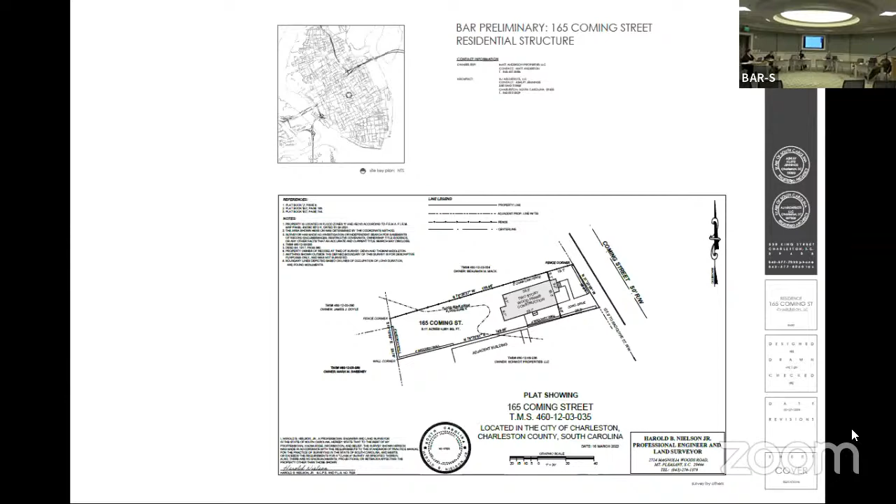So let's talk a little bit about the site. In the process, we've developed the detailing and made some other changes to the structure to respond to those comments. But I'll go first over what we're proposing for the site - looking at the site plan, there's no change to the location of the building or the outbuilding. There's a driveway that's a concrete driveway with a planting treatment system with a rock salt finish, and a lot of planting area around the base of the building.

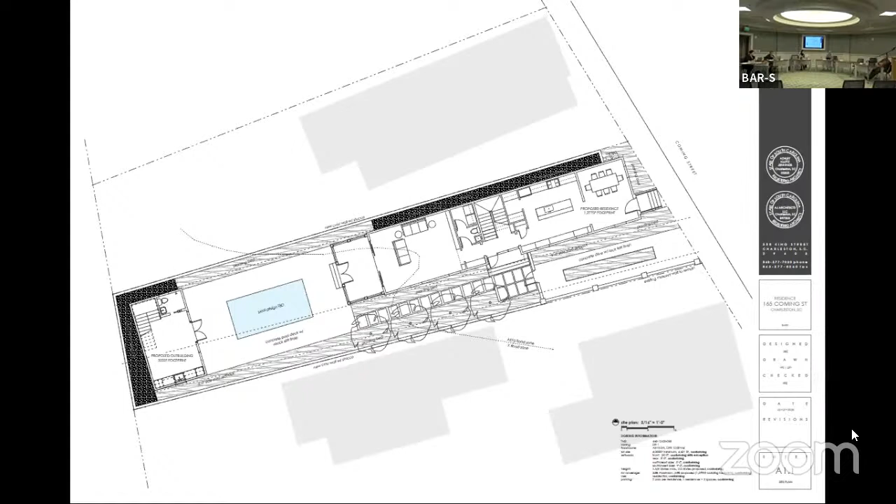We are going to leave the pier and stucco fence system or wall systems along the south property line, turn it perpendicular to the south property line at the house and put a gate there, and then patch in the concrete block wall around the surrounding area of the property. All of it will match the detailing of the existing pier and block wall that's there now with stucco on it.

We're just going over the floor plans now - not much has changed on the floor plan.

So on the elevations, one of the comments was about this overhang, which we reduced. It used to be about 6 inches wider here, and we reduced that overhang and reworked the detailing on the eave. There were some comments about it looking a little out of proportion with the rest of the structure.

One of the comments we got at the last meeting that I thought was really helpful came from the Preservation Society. They talked about the duality of the front of the house versus the side, so we combined the entry element detail to simplify it and speak more to what's happening on the side than along the street front. It still references a traditional entry door with a canopy, but has a reference to the brackets for that bay element on the side.

We are starting to develop a palette of materials now. We have a standing seam metal roof, a boral channel gap shiplap TruExterior siding, composite shutters with forward wrought iron hardware. The base is a CMU with a 3-coat masonry stucco with a smooth finish.

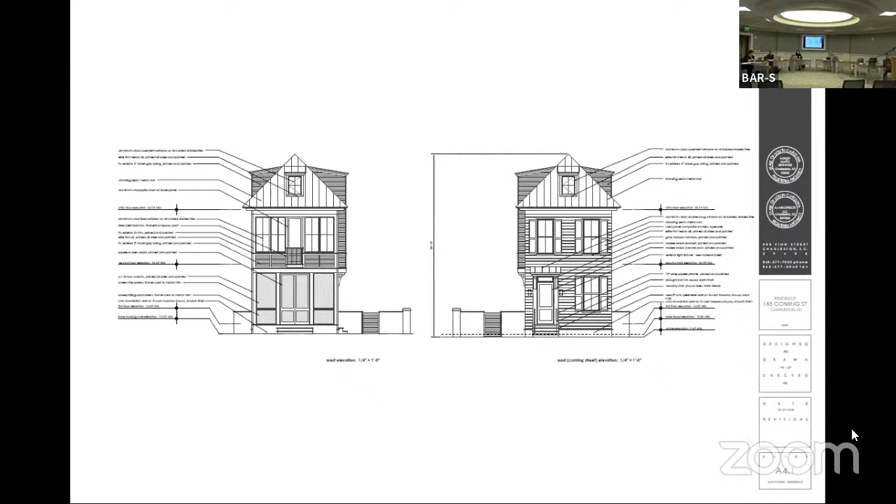So here you can see this long narrow building. We have the bay element that breaks up that rhythm a little bit. The recessed doors are aluminum clad as well, with a panel below and a 3/4 light above. This bay element is treated a little differently, and you can see we're grouping windows here with a panel below, with another type of wall siding - a nickel gap siding.

One of the comments had to do with the dormers and the relationship of the dormer windows to the side, and how the trim was working, so we've refined that a little bit as well. We are showing foundation vents, which would be a smart vent that would allow flood water to come in and out, painted the same color as the stucco.

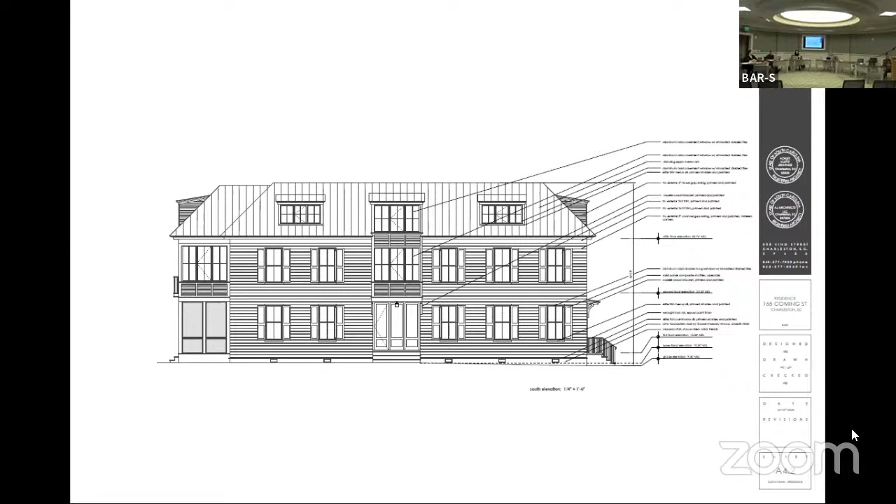Go to the detailing. These are some general building sections just to show the way the building goes together. Next slide please. So here you can see some of this - this is cut through the bay. You can see that we have a custom piece of trim at the eaves that kind of mimics the rest of the roof elements with a bit of an angle here.

In the bay, you've got a different type of siding than on the rest of the structure. It has a smaller profile to provide some contrast to the regular siding. We've got a wood bracket, custom bracket here. Here you can see the concrete steps with the brick pavers and the stucco.

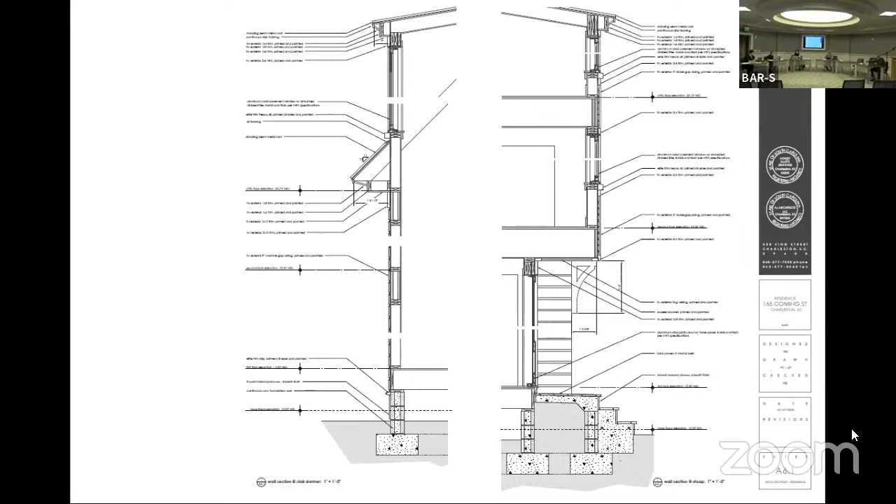This is just through a dormer. You can see the way the dormer window is in relationship with the dormer, and the remainder of the eave. Next slide, please.

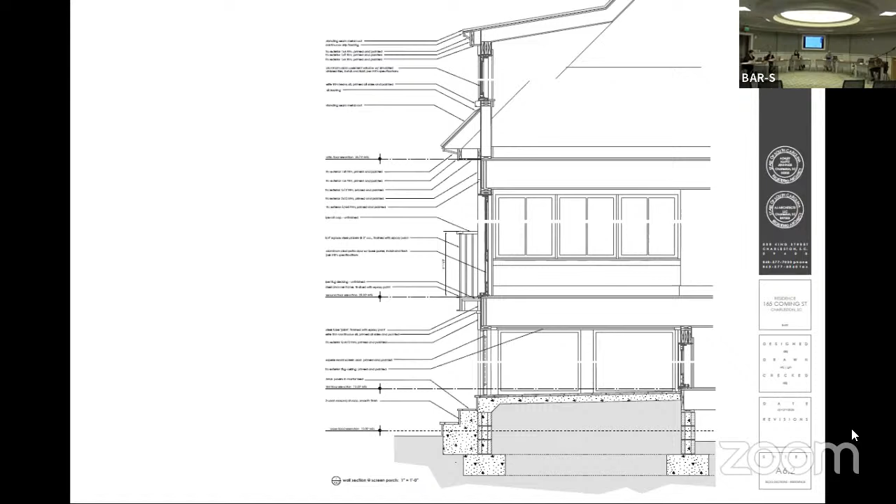This is cut through the rear element where you can see this is very short - this is the screen porch element here. You can see this is that very small Juliet balcony that just gives you a place to step out. This is just a detail looking at the paving, the brick paving pattern on the screen porch, and this is a detailed section through that front stoop that comes up to the entry door. You can see the bracket here and the entry element above.

These are previous and current proposed. So here you can see the entry element - you can see that overhang is smaller here from the previous to the current proposed. You can start to see that we elaborate on the detailing and some of the differences in the entry element here. This is the previous south elevation and proposed - once again, we refined the way these dormers work and the way this bay works.

And the opposite side, you can also see that relationship of the overhang and the way that we treat the dormers.

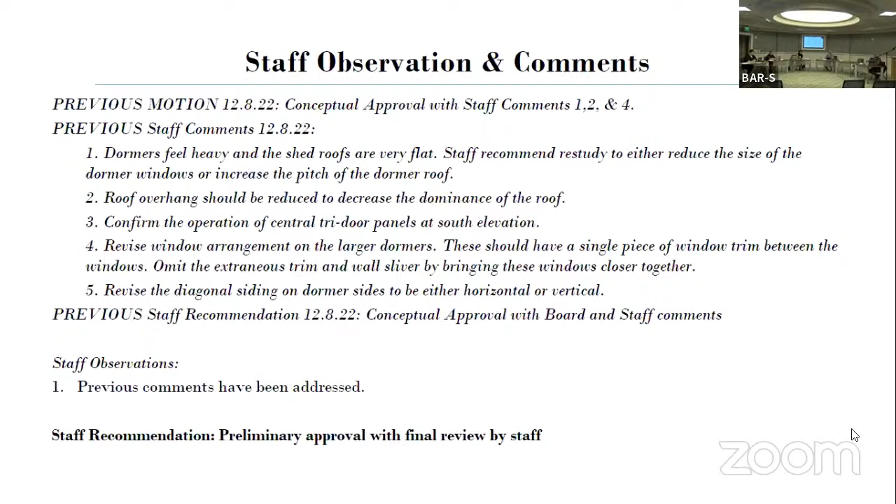Yeah, would you like to respond? Sure. Public comment? Staff handed back the recommendations on the previous and current proposed. I can do it quickly. You want this one? Or?

That was fine. I think when we were talking about verticality in the last meeting, one of the issues was the way that this bay works relative to these dormers. That's what I understood the comment to be about.

So what we've done is you can see here that the proportions of the windows are different than they are here. We've actually made those triple windows taller and skinnier, kind of relating to the proportions of the other windows on the structure. I may be headed in the wrong direction, but I think that's what we were thinking when we were talking about verticality.

Also, there was a lot of discussion about the detailing on the dormers. There's lots of lines here that maybe shouldn't be there. So the idea was to start to refine the relationship of the windows so that it reflected the detailing that you would see more typically. We don't see triple windows in Charleston dormers, but we start to think about the detailing of a window that would be more in keeping with that.

Opposed? We are in board discussion. I think it looks good. I'm in agreement with the direction the staff's giving in their comments. I guess a couple of little quick observations.

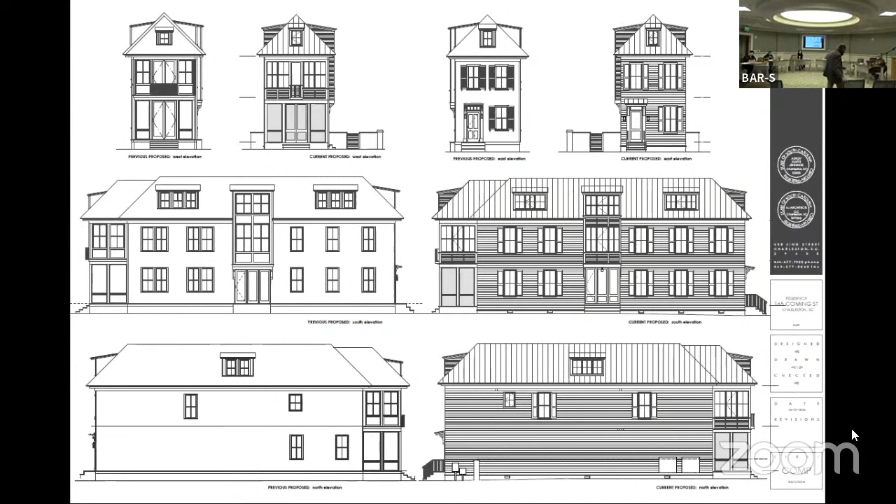Next item is 265B Coming Street.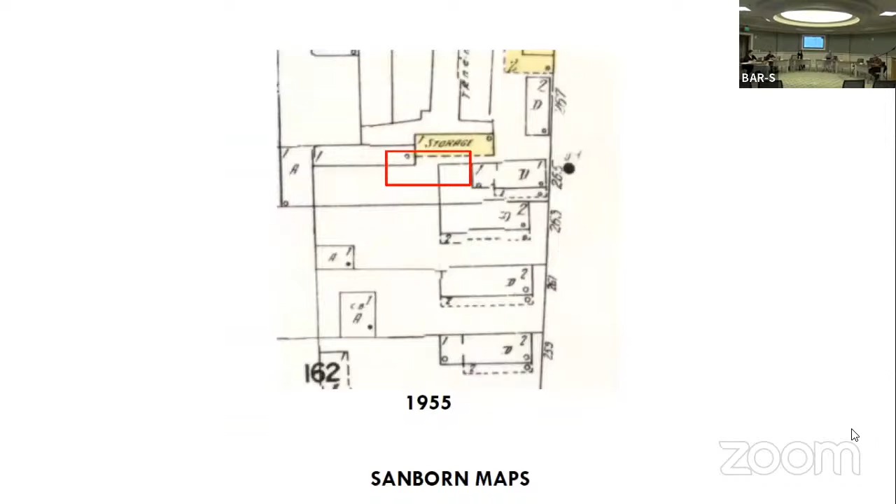265B Cumming is requesting conceptual approval for a new single-family residence in the rear, new construction in Ansonborough, in the Old City District. Here's the location on Cumming Street, existing site photos, some context of Cumming Street, more maps and previous structures. Now I'll turn it over to the applicant.

Thank you. I'm Andrew Gould with New World Byzantine.

So the lot on Cumming Street is this long narrow lot here. We saw this last year when I was here to get approval for this house, which is now under construction, and we're now asking for approval to build this house behind it. Each of these lots is being planned as part of a larger development where we'll have access eventually coming off of Line and going out on Cumming, probably also coming out through this adjacent lot and out to Percy. But every one of these lots is under separate ownership, and the program for them is still very much in flux, whereas my client Cameron here owns this lot and he's proceeding with developing it.

So for now, we're really just asking for permission to build that house, and the future hardscaping and drainage will have to be worked out later. Because this corner building is now finished and in use, the city approved a provisional parking plan - a temporary parking lot that's now serving that building and is going to be serving this building temporarily until we get a permanent larger plan worked out.

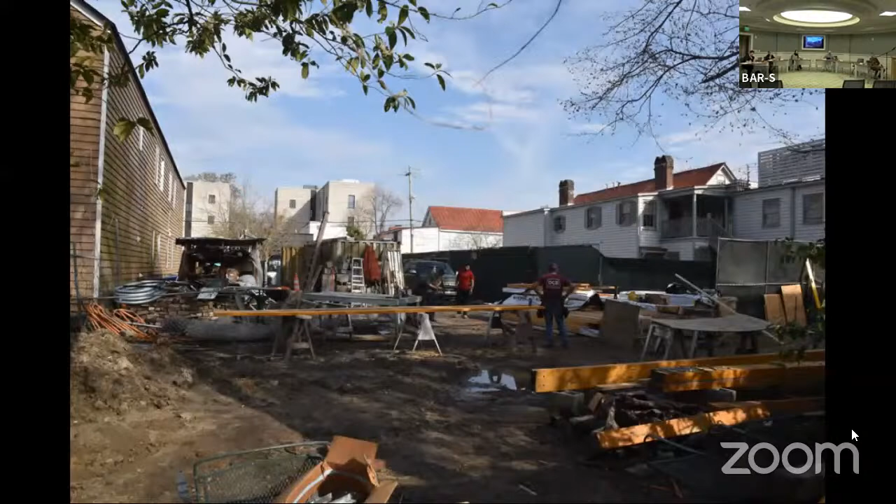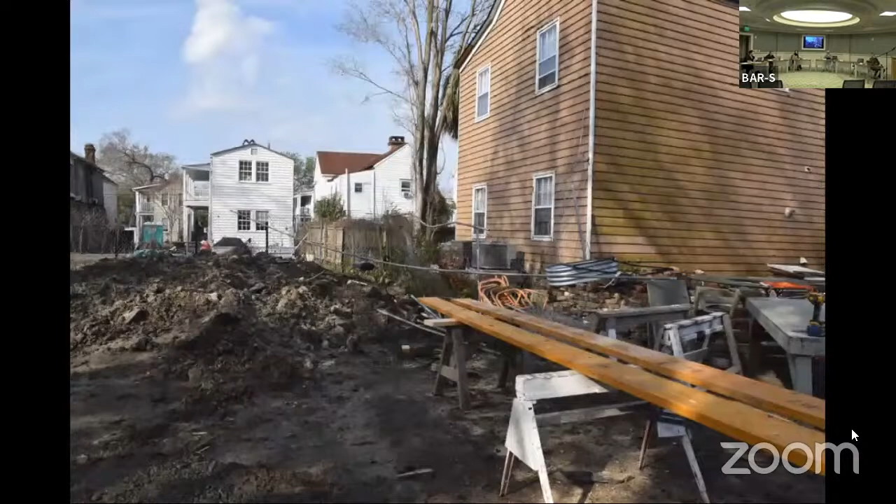This is the larger lot facing Line Street. We're looking towards the back of the house - the new house is going to be right up there. This is standing in the backyard where that new house is going to be built, looking north to Line Street, Cumming Street, and the back of the house under construction. So this is the back of the house under construction, and the new house will be right here.

So you can see the design - it's a nice little diminutive narrow house, only 15 foot 8 inches wide, with a gambrel roof and a wrap-around porch with a curve.

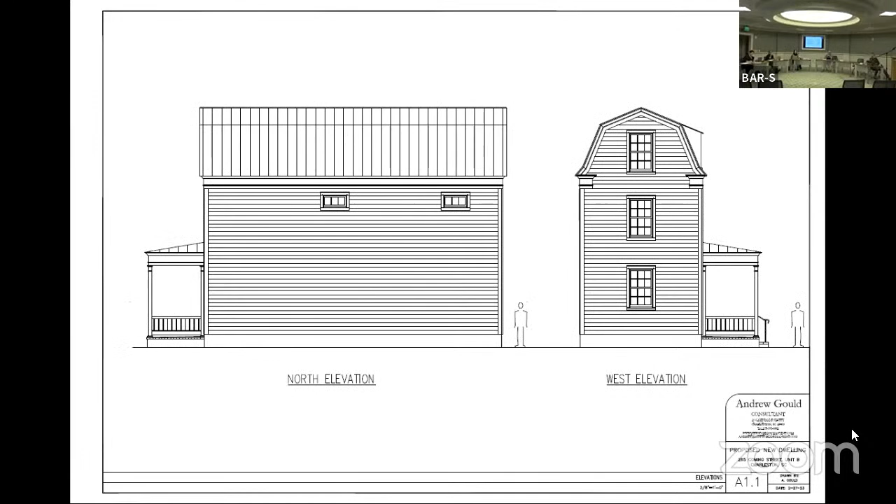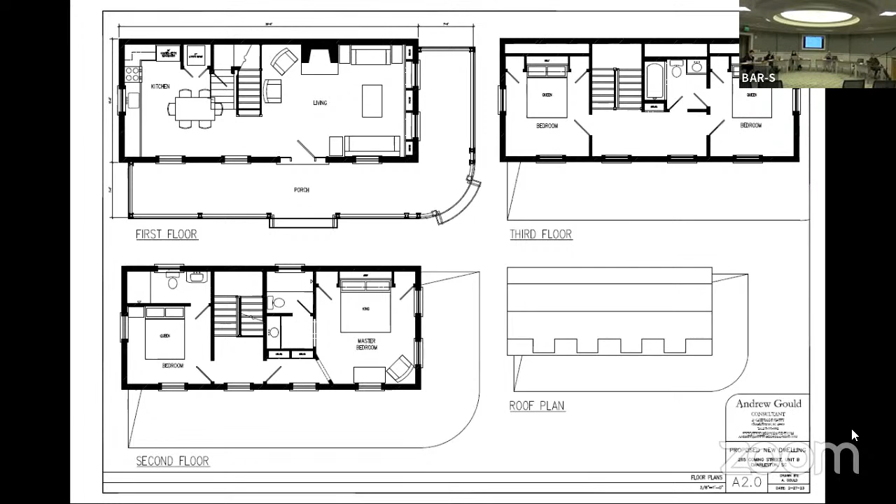You can see the floor plan, and the porch with the rounded corner - something that lots of old houses in Charleston have, but hardly ever seen on a new house. Cameron here, not only is a developer, he also runs an architectural millwork company, so he's game for doing something difficult architecture-wise here. This would be a good opportunity to show off that craftsmanship.

The building section shows how it works on the top floor with the ample roof and the dormers, giving reasonable space up there within the wall height. The wall section - you're all familiar with my buildings, you know all the moldings and details and so forth that I use.

And one map, from 1955, just of interest - there was once a house on the lot roughly corresponding to the house under construction now, and a utility building roughly corresponding to that as well. Now, of course, this being a new house, I'm not trying to copy any particular historic architecture, but the gambrel roof is a sufficiently distinctive and uncommon feature that I think it's worth mentioning - even though it's rare in Charleston, it does have precedent, quite lovely precedents actually, from 18th century examples.

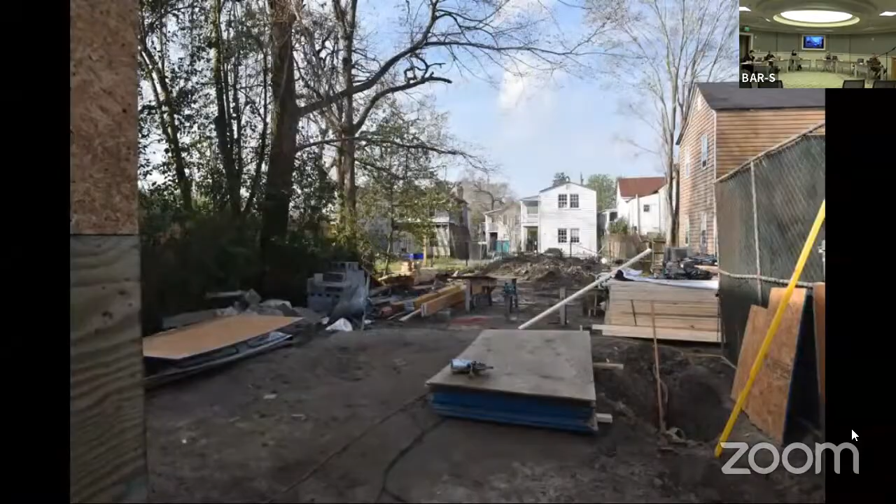Stop there if anyone has any questions. Thank you. Questions?

So, right, so there's no TRC issue here, right? It will eventually require TRC when some property lines are adjusted and access is handled and all that. I did talk to Eric Schultz. At this point, it does not require TRC.

Public comment? We didn't have any written public comment. Public comment?

Merle Bay with the Preservation Society. The PSC consistently advocates that new construction respect Charleston's traditional development patterns, with accessory structures that are subordinate in height, scale, and mass to primary buildings and follow limits. As proposed, this rear building is not subordinate as required by the ordinance and would be prominently visible from the street. The footprint of the rear building should be narrowed significantly and set behind the main house. Additionally, we would like to see the third-story window in the gable decreased, in keeping with the traditional hierarchy of fenestration. We ask for...

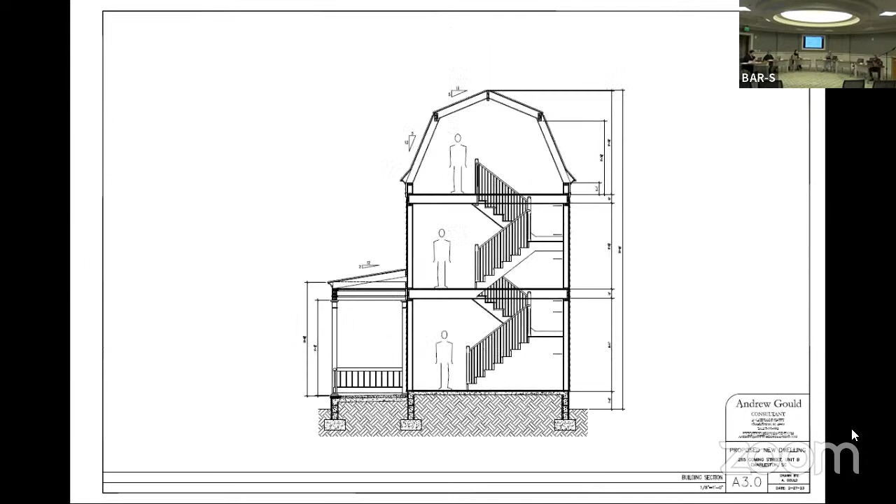Speaking to Julie's question, it will eventually require a TRC approval. And we did have one observation that it's a zoning requirement. There's an area labeled as anticipated future parking, which says it's within the 7-foot setback, and the zoning requires 9 feet of width for parking. So we just wanted to make a note of that because we don't want you to have any issues in the future with TRC. So typically with site plans, we would request that anything anticipated not be noted on the site plan, so that it does not appear that BAR has approved something that we have not. So we're recommending removing anticipated future house parking and egress from the plan. We understand that it does make sense for the board to know where these things are.

Other comments: paving and landscaping should be included by final review. The form is concerning as it is not consistent with the neighborhood and in Charleston in general. There are examples in Charleston, but the vast majority of them are masonry buildings with a parapet wall and not wood frame. The stylistic details of the gambrel roof are unsuccessful here. One of the provided examples, only one is Cannonborough-Elliottborough. Similarly, a similar proposal with gambrel roofs was denied at 56 King, which later was approved with hip roofs. I'm sorry, I can't read my screen very well.

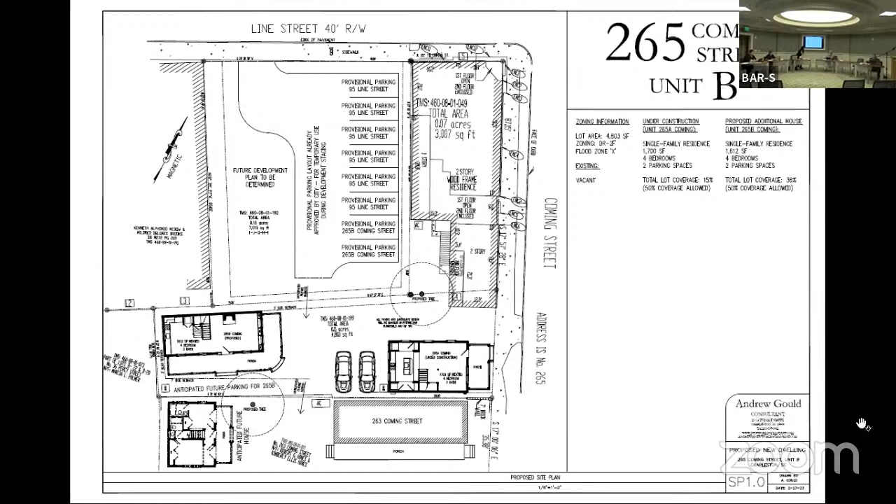Maybe it's the other A1.0? Oh yeah, that one. I see him with that slope right there. Yeah, so if I compound miter stuff, well, it's just an unequal hip. The hip here is shallow. Okay, understood. It just doesn't look good to use a shallow hip in the center of the building, so it's just a steep edge. Thank you.

While we're looking at that east elevation, thinking about the Preservation Society's comment, I mean you could achieve egress with a casement window if you wanted to.

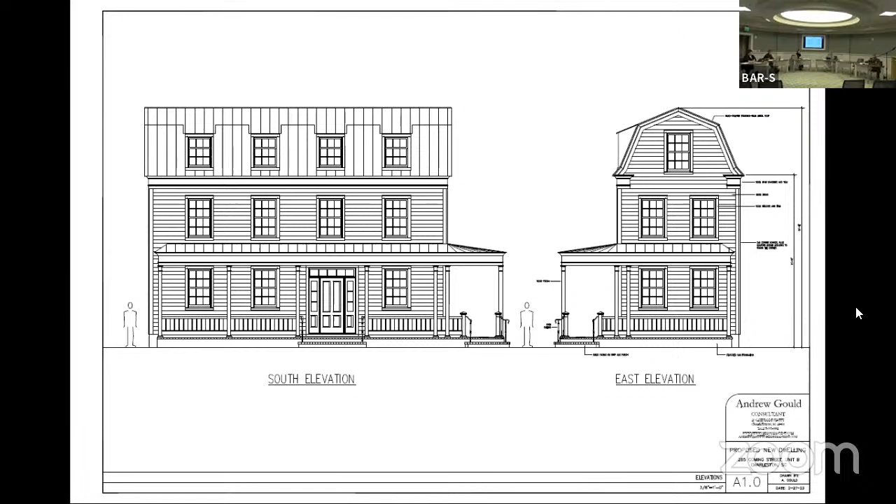And then I'm a little confused about the sequence of events. We're not supposed to consider some things that are happening in the future, but we're supposed to consider a common courtyard that will be used by this, even though they're all owned by different people, but it's all going to be the same eventually. I'm having a little trouble with the logistics. But although I somewhat disagree that Cannonborough-Elliotborough doesn't have the traditional paradigm of large houses and then smaller outbuildings, better than the things that you've done, I think I'm okay with this approach to the massing on this site. It would be nice to have clarification that this proposal is zoning compliant and to understand what site plan we're really considering at this phase of everything.

Yeah, clarify that aspect a little bit.

Well, the mere fact that we share amenities across multiple lots does not trigger TRC. What triggers TRC, according to the ordinance, is having more than two dwelling units on a lot. So, you know, I guess you'll have to take our word for it, that these lots are under friendly ownership and being developed in common, and the idea is that that's all going to be shared. I can't prove that will be that way forever, but I just wanted to tell you that's a feature that's already built. It's right across from this house. Okay, thank you.

So just the lot, the way it's laid out presently, functions. You're seeing all of those things just as it's shown right now. So you don't technically have to go for any approval for any of this, correct? No.